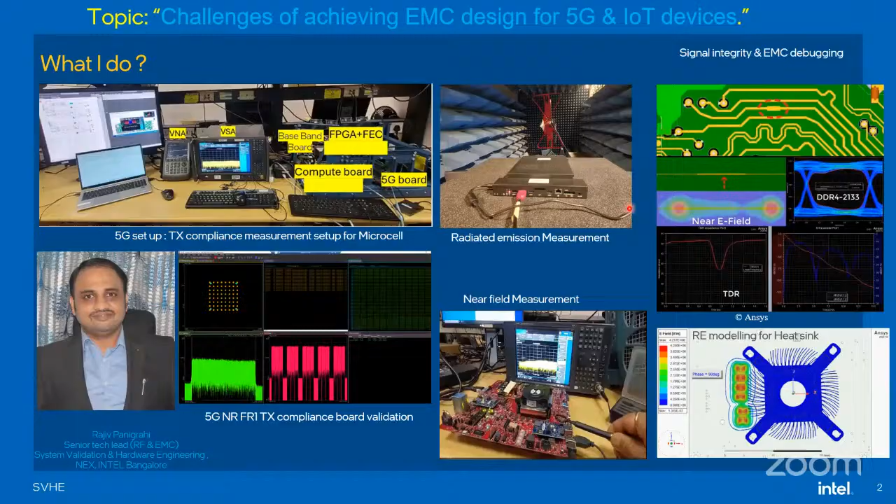So that's all about this quick EMC measurement and simulations overview. As I told, I'm quite involved in academia recently. So for the last 2 years, I'm offering a course at IISc Bangalore under the proficiency course, where we discuss the fundamentals of EMC for professionals.

So we see how, from the scratch, you design and introduce EMC at the beginning itself, so that it saves time as well as cost, and also gives you a good signature before going to certifications. So I have taken one common slide from this course - wherever I go, I take these slides and discuss this.

We are engineers, so when we read such things in a national forum where a national paper discusses engineering stuff - it says something related to cybersecurity, as well as somebody using AI. We heard this buzzword, AI. Through AI, they can actually steal your passwords. You might have seen news that a few passwords are weak or got leaked, but this is very big, on the front page, saying that hackers can actually use AI and HDMI cable to do this.

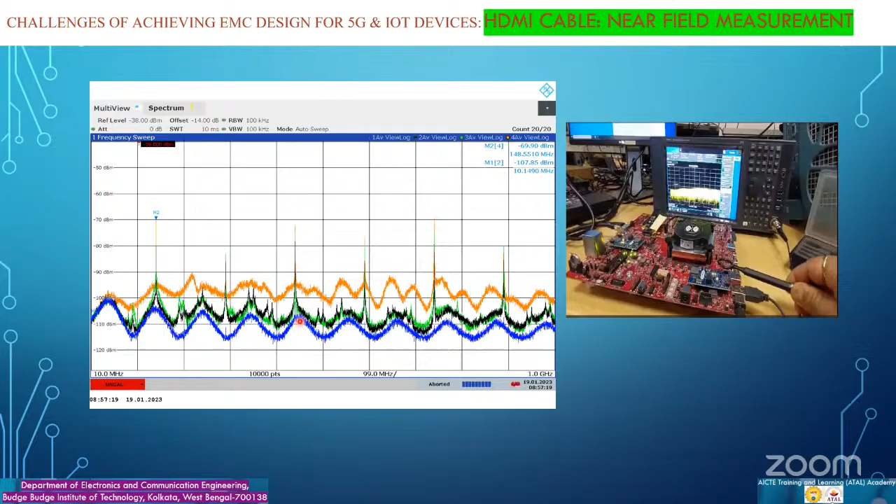So the question comes: how come one HDMI cable has a different electrical behavior? This is what is talked about on the national base. One raises the question based on the submission. Another says the answer, it is not necessary - all HDMI cables actually start radiating. So it all depends on how your cable is.

If your cable is well shielded, metal wrapped around it properly, you fall under the green board. If your cable is poorly shielded, you come under the orange board. So the answer is dual.

Yes, it is capable - as the submission says, if from the HDMI cable it is capable of radiating, you could use some convolution neural network to retrieve the data. If you can retrieve the data, certainly you can actually steal the passwords. That's what it talks about.

At the same time, if it is properly shielded, and technically if you look at those coupling behaviors across the frequency, then you actually lie on the green board, where it tells you it is impossible to get your data. That's what these two are talking about.

So you have to look at it in terms of engineering thoughts - how it is possible or how it is impossible. The answer lies in what you're actually looking at. So you have to choose the proper HDMI cable. That's why EMC becomes very interesting.

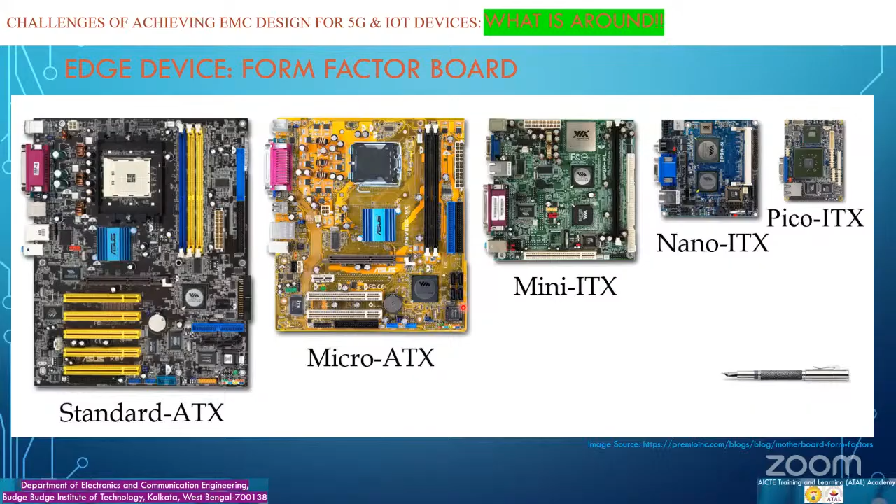So you make any small or big system, this is how it looks like. Maybe you have analog circuits only, or a digital circuit, or a combined one. You need power circuits, you have to run it, right? So to run the system, you need low frequency circuits. To reach out to the outer world, you need connectors. If not by cable, you have to do wireless, that comes under Wi-Fi or Bluetooth, right? But to assemble all these interfaces, you need a multi-layer PCB.

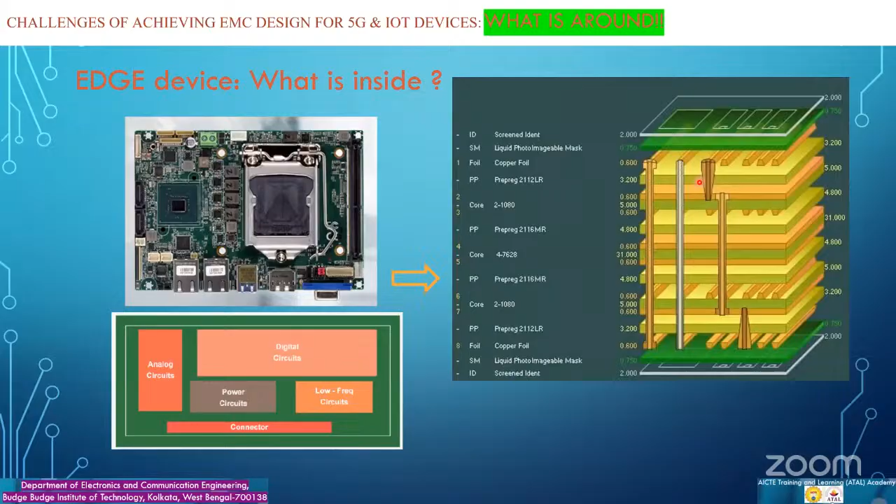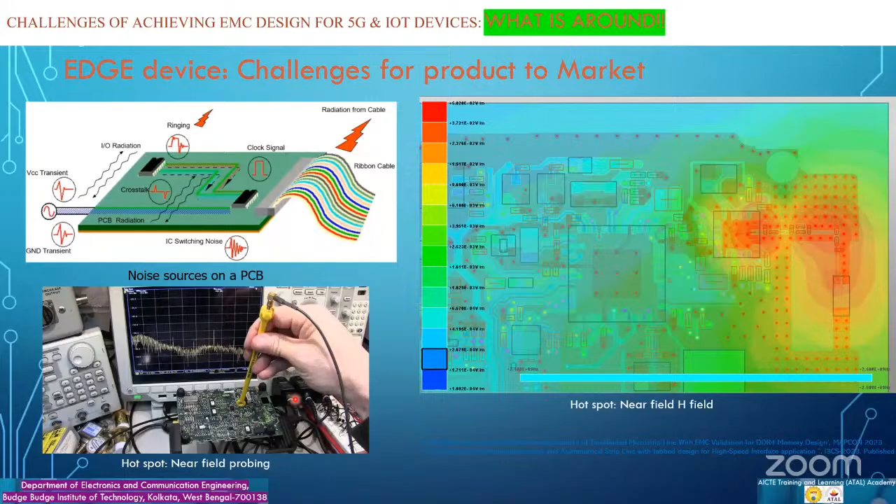So France halts iPhone 12 sales over radiation levels. This particular iPhone actually exceeded the limit, so that's why they stopped it. Just imagine, France has ordered Apple to stop selling the iPhone 12 for emitting too much electromagnetic radiation. It means you have made 1 million products, and just because it couldn't meet their requirement, they said you cannot sell it. That's a huge loss.

So what we understood from here is that when you couldn't meet the certification from EMC, electromagnetic compatibility, it certainly impacts the user itself. If the user is using a pacemaker and your product is not qualified, it can interfere with the functionality of your pacemaker. When you say interfere, it's not intentional, it's unintentional. It means it can stop your pacemaker. That's a hazard. There's so much other history also there.

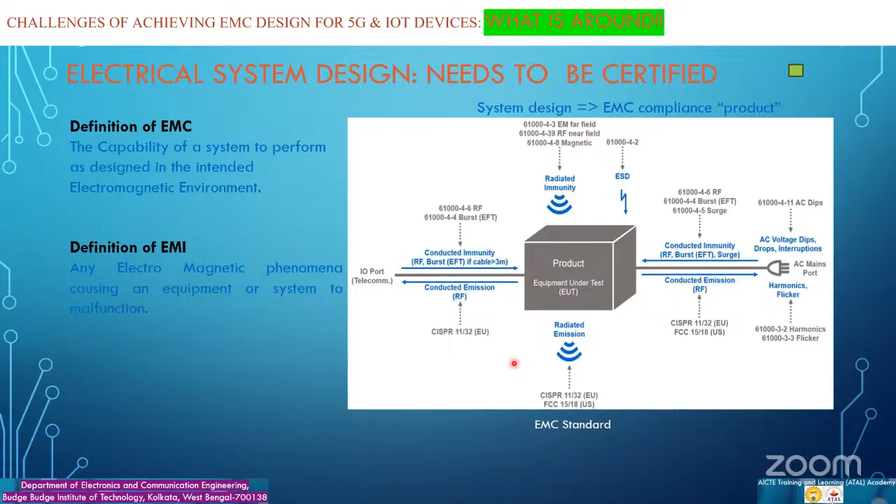Likewise you have CISPR 11 or FCC 15, CISPR 32. If it is automotive, CISPR 25. Likewise, they will give you these numbers, and you need to get tests at the lab and make your certification ready before sending to the customer. Okay, so that's all about the fundamentals of EMI and EMC, right?

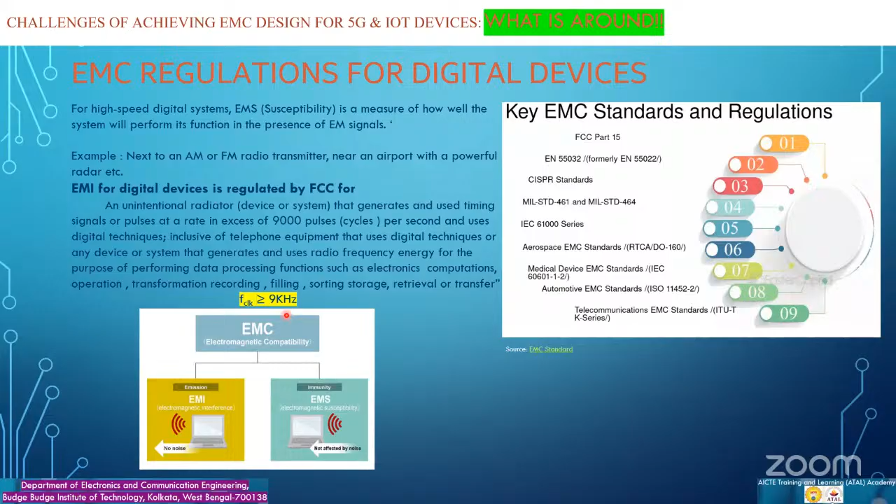And you see here, this is very fundamental, like the F clock of 9 kilohertz. It depends - when you are doing a test for your product, there are certain bandwidths also involved. This 9 kilohertz we will discuss in more detail when going into the simulation part. So now again, coming back to the edge or the 5G - we are actually surrounded by different wireless devices, right?

As we discussed, other than EMI and EMC, there is something called RFI, like siblings fighting inside the home. So if your interface, other than its functionality, starts interfering on the antenna side, basically you are talking about the receiver side.

So basically what you are doing is threatening your receiver sensitivity. Let's say your Bluetooth is capable of 1 Gbps speed, or your Wi-Fi is capable of transmitting or receiving at 1 Gbps speed. Because of internal interface interference, or radio frequency interference with your antenna or Wi-Fi receiver, whatever throughput you have will come down. So that comes under RF desense.

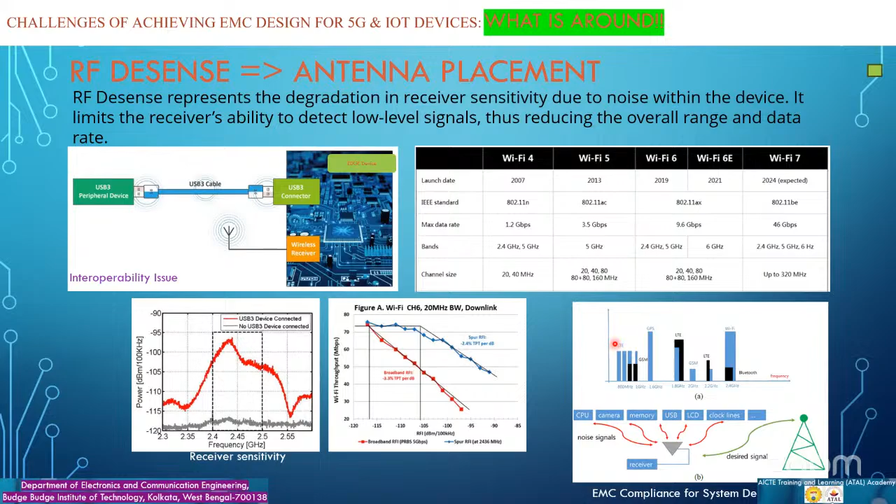So that's a challenge - we have already discussed that. That's why, to meet those requirements, you cannot have a compromise. That's the point - if you miss any of these particular topics.

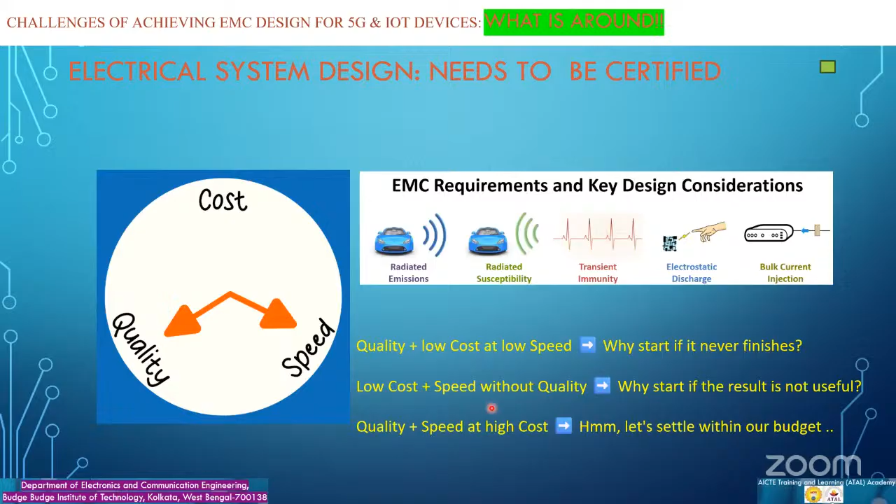So now the question comes, when I make an electronic design, how does it look? This is what you get - an EMC measurement test report. So what we see here is, for any given DUT, these many tests are required. I don't want to go into too much detail, since unless you are introduced to it, it looks very boring. But you can see, for a given electronic design, this is the report.

It's available on Google, you can actually see it, and you can see the product too. That particular product has so many tests - this is how we do the testing.

So this involves the cost. Whenever you are doing any kind of test, it involves cost. The cost involves going from your lab to the test lab and coming back, because you're not a goldsmith who knows the design will pass. If you pass at first, you are really lucky, but most of the time you get failed because of some minor mistake. Because of that, these many tests and these many costs will be added until you pass it.

So this is what it tells - if you want to do a full FCC SDoC test, you have to spend around $5K. Full FCC certification will be $10,000.

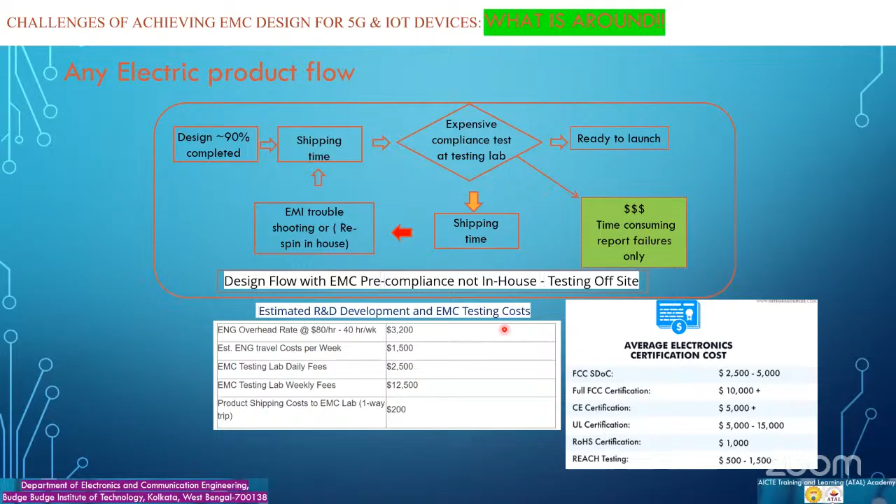These are the different certifications you do, and you'll spend this for every product, plus you have this additional cost. So let's say if this many tests have to be done, this is the cost of the whole process.

In case you haven't introduced the design and pass it to the lab, you have to pay the money. So what we see here is if you introduce your design at the pre-compliance test stage, it is quite possible you can identify issues before going to the lab, fix it, and then send it to the lab, which will actually reduce your cost.

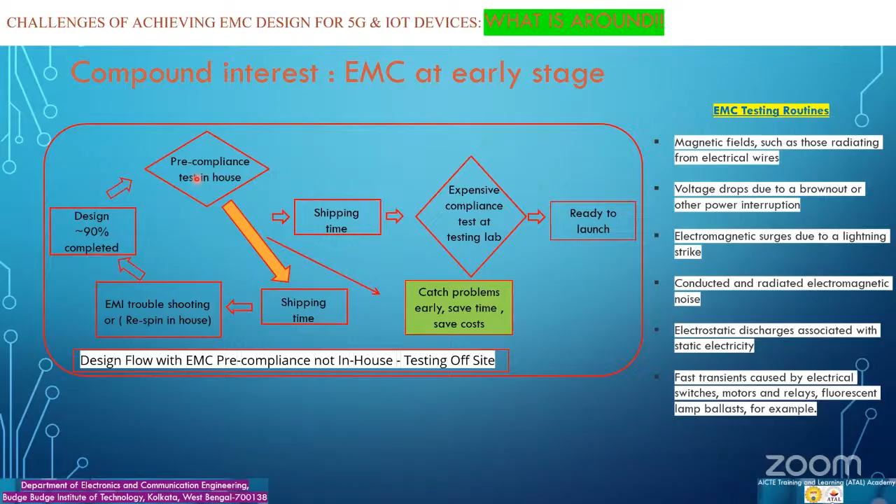That's the ideal approach, old school thinking. Before going to the given test, let's have a pre-test, similar to how before any exam we have a pre-test kind of thing. That's called a pre-compliance test. It can be in your lab or another lab which will be cheaper. But still, unless you qualify here, you have to repeatedly do it.

So if you are going directly to the test lab, what you'll spend is 15 weeks and $91,000. This is for a given product, product cost not involved. You made a product and have to pay this much money if you want to sell in different regions with particular applications. So it takes 15 weeks and $91,000.

But what if you have pre-compliance done inside your lab? That 15 weeks reduces to 9 weeks, and whatever money you spent earlier, 91K reduces to 43K, almost 50%. So that's your reduction in time. It's always good to introduce pre-compliance in-house, so you actually save a lot of money.

From the EMC point of view, what is saving money? If you introduce this pre-compliance in-house, this represents 1.9 million in revenue, because any latency means any delay to the market, and that reflects your revenue as well. First you have to spend money to get certification, and until you get it, you cannot launch to market. So you have to spend both. This is what actually is your gain - by introducing pre-compliance in-house, you save $1.9 million.

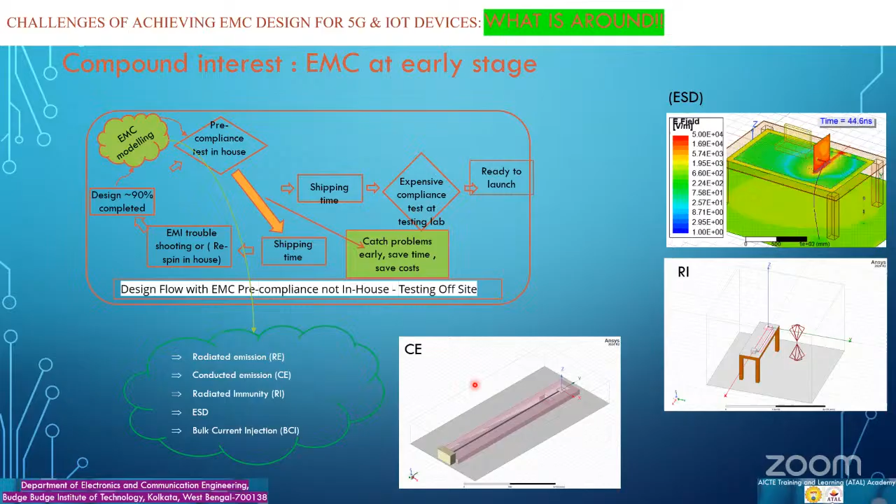So that's today's capability. Now the immediate question comes - anyway this is through electrical engineers, but if you look at it from the EMC perspective, I'm talking about engineers who are making the electronic product, not any electrical engineer specifically, just engineers in general. When it comes to engineering, you have no excuse not to learn mechanical, thermal, electrical, power delivery, or the CAD side. You should be aware of it, because when you are making a product, these are all part of your game. You cannot say I'm an electrical engineer, I just look at my EMC electrical part.

No, then you cannot make a proper electrical product design. You need to understand how the power delivery happens. If power delivery is happening, you should know these things at least a little bit, just to stop any EMC issue from the power delivery aspect. Same thing applies for mechanical, thermal, and CAD - whoever designed the entire board. Whenever any EMC issue comes up, generally people say, okay, since voltage or current is involved, it belongs to the electrical department. No, it belongs to everyone. If anyone actually misses it, the EMC issue will pop up. So that's what you need to be aware of, especially if you are making an electronic design, since certainly you have to meet your targets.

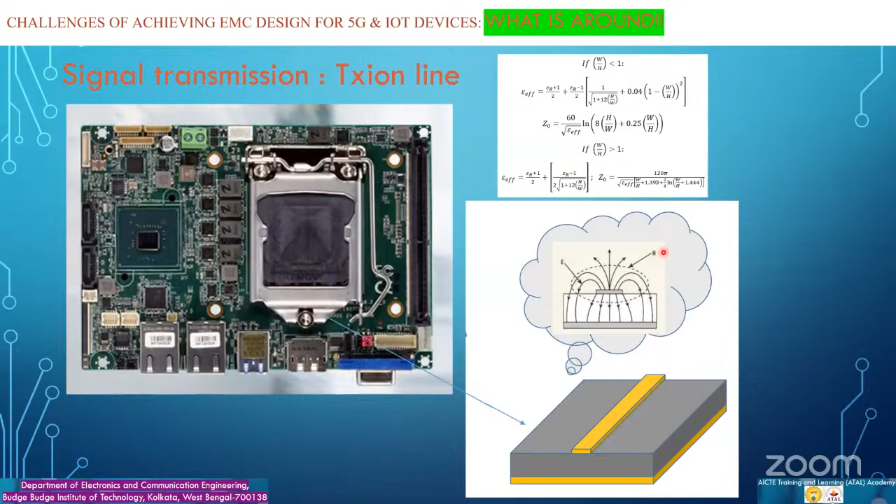Now going to the little basics, since this is a session where we want to understand what is EMC. This is a very fundamental transmission line, where you have electric field and magnetic field. Going back to different types of electric and magnetic fields, you say different types of transmission lines. What does the transmission carry? It carries your electromagnetic fields together, where E field and H field look like that. By understanding this electric and magnetic field, you can actually work out how this board looks like.

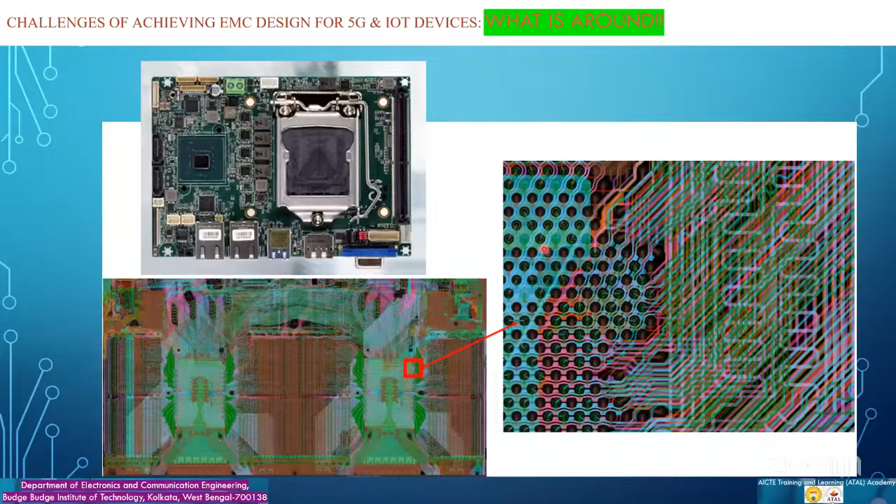So what we saw earlier, that's what's taught in the class - the transmission line looks like this. But actually, whenever you go to an electronic board, these are all actually transmission lines. They are all netted - almost 10 to 20,000 nets are here, and they cross each other. So that's the important part of your EMC modeling. With this, you have to verify whether you have issues on EMC or not.

So again, coming back to the basics - this is what we actually taught in the class. This is my electric field and magnetic field, and we just follow Maxwell's equations.

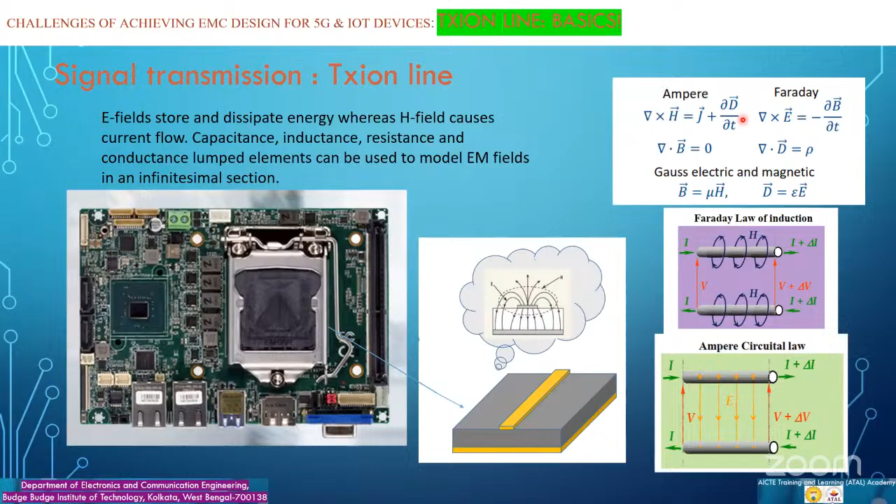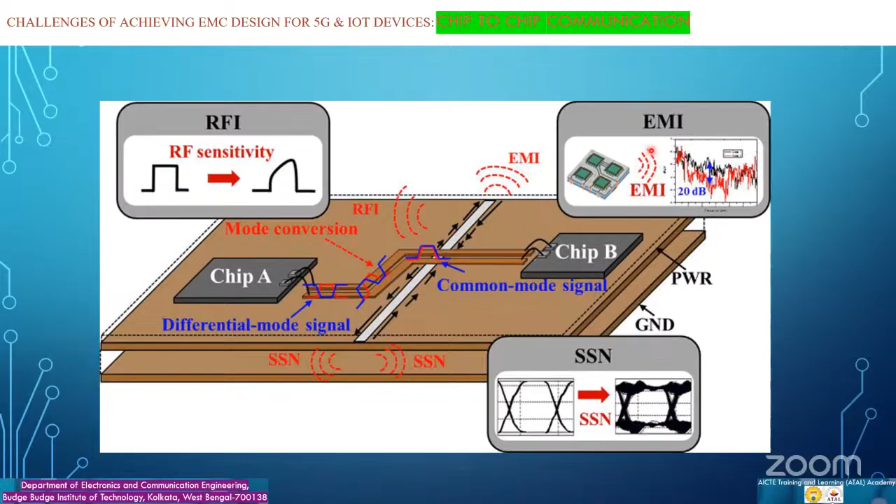If you go real time, you see communication between chip to chip passes through all these power planes and the split ground plane, which causes a lot of your RFI and EMI. That's actually something you can analyze.

Coming to the electrical design a little bit - when you're trying to communicate between chips, you need to understand how it works. These are the parameters on the frequency side from the transmission line characteristics, involving return loss, insertion loss, and crosstalk.

But when it comes to the time domain, this is how the pulse looks like. So what you send at 1 volt, you will get at 0.5 volts - from the signal integrity point of view, you see the functionality is degraded.

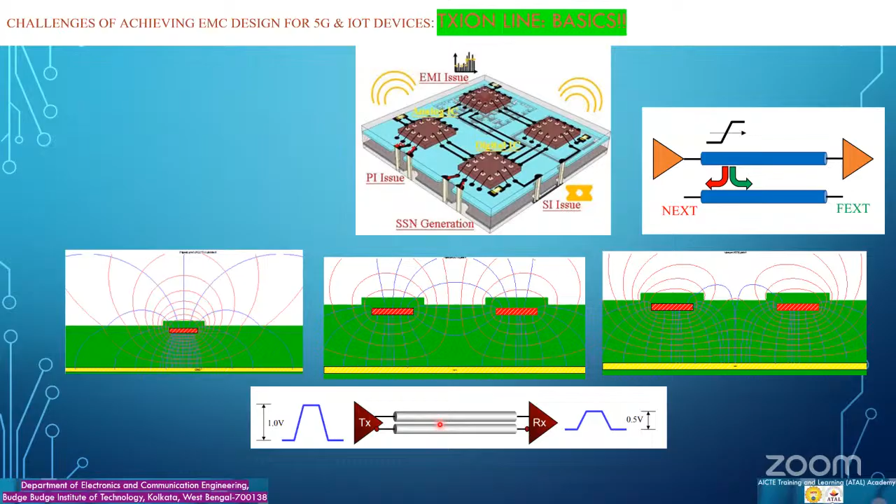But the immediate question comes - where did this 0.5 volt go? You sent 1 volt, you received 0.5 volts. So where is my 0.5 volt? It's actually dissipated, either as heat or as radiation. This is how it looks like.

For any given board, it can reach out through conduction or radiation. Conduction is through electric current, radiation through electromagnetic field. It can be inductive coupling through magnetic field and capacitive coupling through electric field. Between two circuits or two chips, you'll see these emissions of radio waves.

Electromagnetic inductions and electrostatic induction - when you try to connect to the outer world, it induces noise and starts radiating. What we discussed at the beginning about the HDMI cable - this is how your cable carries it. When something is emitting from an RF point of view, it's an electromagnetic wave, but from a data point of view, you're leaking out your information. It's radiating means it actually carries your information or your data.

Now if I go to the basics of EMC - why does an IC actually start radiating? This is very fundamental. If you see a dipole antenna, when you give 0 volts, all your electrons are stabilized, but when you apply more than 0 volts, there is a movement of electrons. The direction of electron movement changes with the voltage polarity. Now immediately when you move to a sinusoidal signal, there will be movement on both sides.

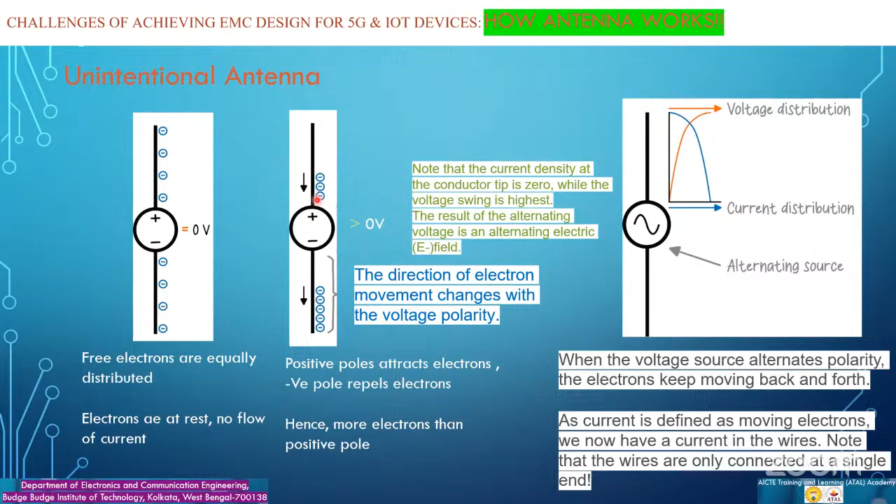Because of that, what we see is it will create an E field or an H field, and this is how it looks like. So your IC - this is just reverse engineering of how the IC looks like. This is your IC, this is your signal or the forward current, and this is your ground, which carries the return current.

But if it's not properly designed, the same IC, which is capable of functioning under particular conditions, can act as a radiator. So this is what I wanted to show - although that's the basic of an antenna, this is how your IC can also radiate. It's not necessary that only through the cable can you radiate - from your PCB board or the system, it can also radiate.

So to stop that, you need to understand through these RF tools or EDA tools, or certain basic thumb rules we'll discuss at the end, so you can stop making those mistakes. If you do the reverse engineering, EMC is nothing else but reverse engineering of your RF side. Generally in RF, we make an antenna which is intended to radiate, but in EMC, we try to find out why the radiation is coming, which is unintended.

So it means it is someone's mistake. You are finding someone's mistakes, trying to understand how Maxwell's equations work and how antennas work. From that theory, you try to find out the source of your emissions. So that's how the basic of your IC starts radiating - at the beginning we understood how your HDMI cable starts radiating.

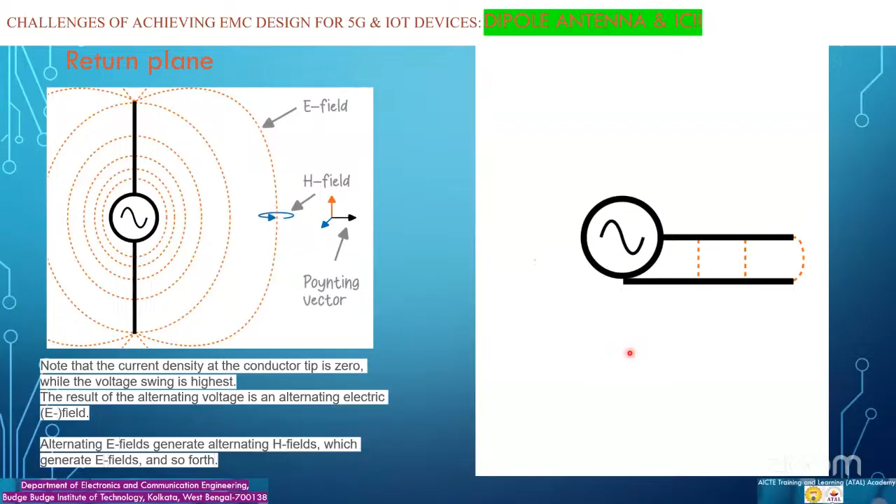Now we are seeing here, yes, your IC can also radiate. What we see here, the pin which carries the signal and another pin which supports the ground, can act as a dipole antenna.

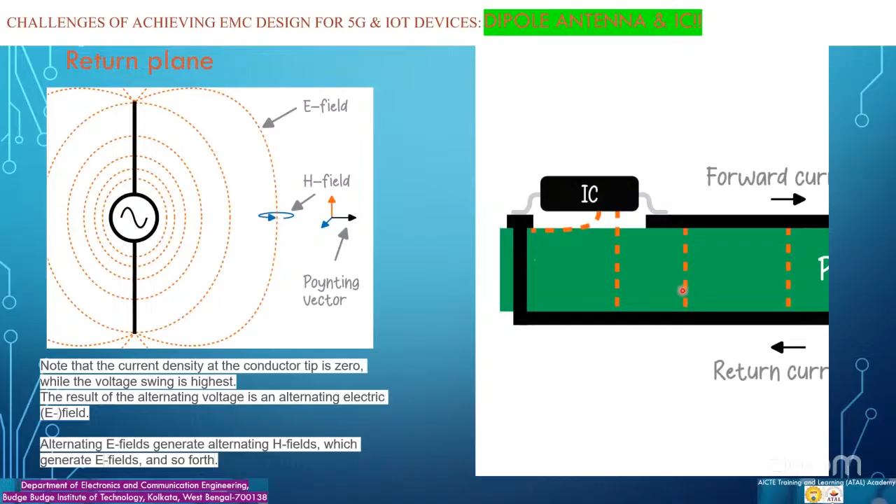So it means your IC also can act as a dipole antenna. To stop all those things, there are some basic rules - you have to make your design robust. This is the fundamental one we just go through. It's not limited to only those 9 rules, but if you follow it, it will be easy.

So coming to the base of your system design, you have to follow certain things so that whether it is 5G, 6G, or IoT, at the lowest latency with a smaller size and robust design, you will still pass the EMC requirement. Because if you fail to meet the requirement, you cannot sell it or tell your friend that you have made a design. If you want to tell someone that you have qualified the EMC, then the neighbor will know that you have made a design available in Amazon.

So that's what we are saying - these are the basic thumb rules. If you want to make your crystal clock, which is the main source of your total processor design, you have to make the crystal clock more robust, so you have to give more shielding. Similarly, there are some high-speed interfaces, and as we discussed, you have the power planes. The power plane and the high-speed interface can actually interfere with each other, so you have certain ways of keeping them separate.

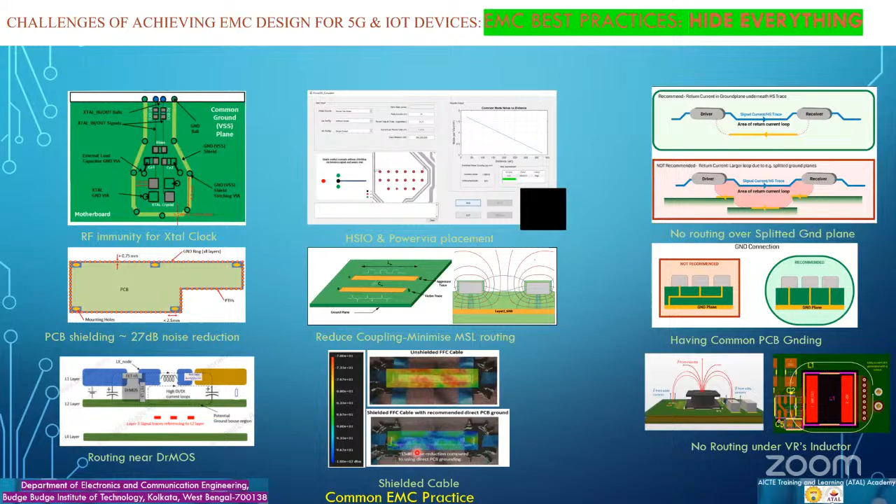So with this, I've tried to collate the challenges for achieving EMC design from the 5G and IoT devices. If you look at whether it's 5G or 6G or any advanced technology, if you're involved in electronic design, you need to introduce EMC at the beginning.

So here is some current work. Keysight and Ericsson have already demonstrated a pre-6G network at IEEE International Conference on Communication in 2024. We are at the end of 2025, so we are already advanced. This is a claim by the engineers that they have demonstrated it - that's what we read, Ericsson has demonstrated it. At the same time, this creates a lot of problems - the 6G impact on EMC.

What's next? Whenever you go through the chronology from 1G to 6G, you're basically increasing the speed, increasing the frequency, and decreasing the latency - you create a lot of problems on the EMC side. This needs to be understood in more detail. Without compromising quality, delay, or cost, you can actually make it to the market. For more detail, you can look at the pathway on 5G EMC testing tutorial - it's beautifully written and describes the challenges on the 6G side.

Okay, with this I will try to close. I think I have extended almost 5 more minutes. If you have any questions, let's have a quick one.

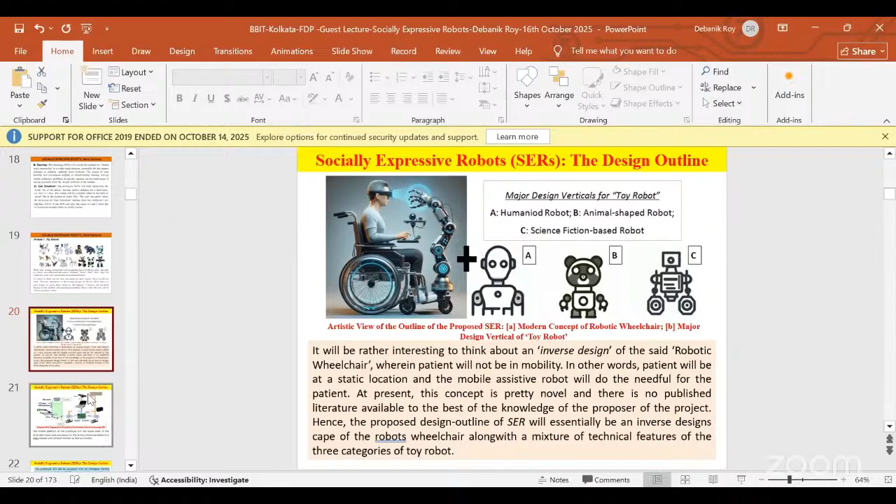There are two modules. One is module one, another is module two. The first module I am calling the HMI console, which is extremely important for SER, because that is the console through which it can have the feel of the game. And the second module is essentially more on control system development, with motors and software and all those things.

And of course, all the mobile robot technologies like SLAM, simultaneous localization and mapping, and sensor driven things, these are all applicable for SER. Most of the navigational things for mobile robots can be taken for that. In fact that has grown and become very stable in our country also. Now in India we are manufacturing full-fledged mobile robots with our homegrown technology.

So I thought all my SERs, or even my robotic wheelchair design, must be built on mobile robotic technology, because that is a more stable technology that we have already come across. And the standard systems of mobile robots, sensors like lidar, camera, or proximity sensors etc., we can use, and the technologies are available to sustain there.

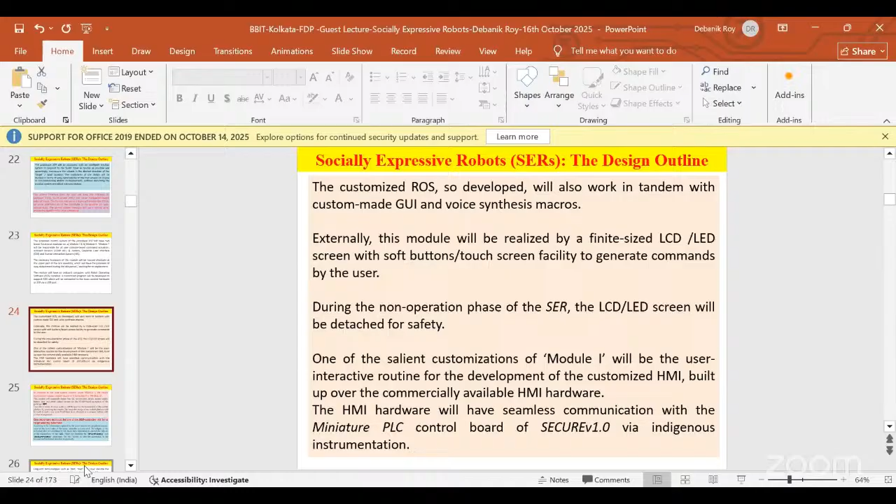One important technical feature for all SER controllers is target seeking behavior. This is a very important thing.

This target seeking behavior means it can either be a guided locomotion or a free locomotion, like when the SER is not having any duty, or the patient is sleeping or not somewhere in the vicinity, then the SER can have its choice of free mobility. So that free mobility is essentially the mobile robot kind of thing, target seeking. But when it is interacting with the patient or with a human, its behavior will be totally different. It cannot afford to go around and hit the patient by virtue of its locomotion, and at the same time it will also respond to his query, so then that is not possible. So this target seeking behavior is a very important kind of interlock that all SER controllers must have.

That's a very important precondition that we should know, how it happens actually. And for that, in order to have this kind of situation dependent decision, the way a human can do it by virtue of our brain, how can you incorporate this situation dependent paradigm in the SER? There is no other technology other than fuzzy controller.

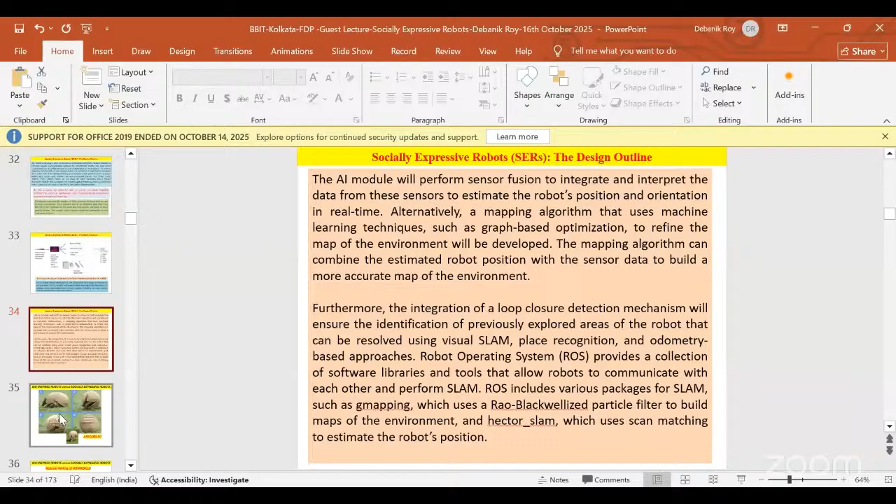So this is more or less the background of that. I will come to the details of the SER design, but first I'll take a detour into some interesting biorobotic features that helped me conceptualize this SER. I thought I'd take 5 to 7 minutes of the audience's time. This particular animal called armadillo actually took my attention quite some time back.

This is the principle - I will show you the schematic of the latest SER, the Spark, which is a spherical type robot design with piezoelectric sensors etc. I've given it the shape of a monkey, but the rolling is attributed to this armadillo kind of thing. So this is a very interesting creature in nature.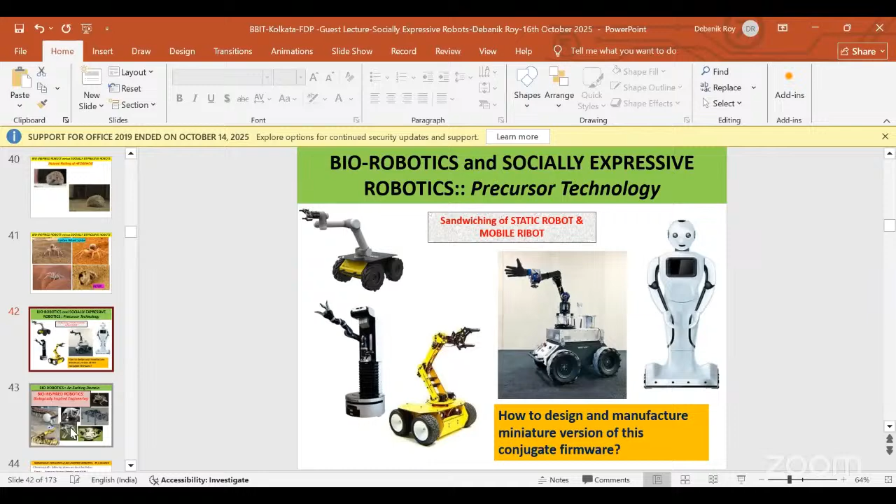Essentially, biorobotics and socially expressive robotics, as I mentioned in the initial slide, are the common thread - one is intermixed with the other. As we advanced with mobile robot plus static robot technology, that gave the basic clue for designing all ACRs. Nonetheless, the biological part is very important. Bio-inspired robotics, as we call it, has seen so many developments worldwide, and those are the clues. In that sense my research progressed, and we arrived at the ACR.

In different phases I have researched, and we came to the level of ACRs now. I will quickly show those. This is one design we made for a robotic leech, and this concept was used in the CURL project, and finally in the ACR, where crawling and rolling happen together. We made it a fully indigenous development, very small items.

It is for surveillance. Some ACRs are important for rescue and surveillance, as I mentioned, and there's even a national level thrust for doing that. So for surveillance, we must have a structure that can go along - we cannot afford to make a very huge robot for that. This is some of the prior art that helps us do that kind of thing.

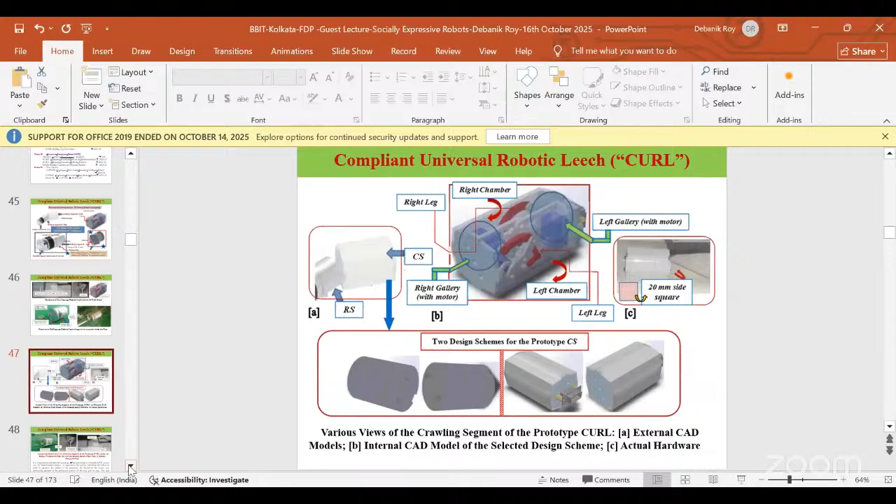These are extremely small volume designs, 20 millimeter by 20 millimeter cross section kind of a thing. You can imagine the small cross section and how technologically we have made these things. I am not detailing this much, but some YouTube videos are there which I will refer to, and one can see if interested. I'll just play a little bit, but not much.

We also started with a thread-based technology, and here it is shown that with a curvilinear surface also, this can go.

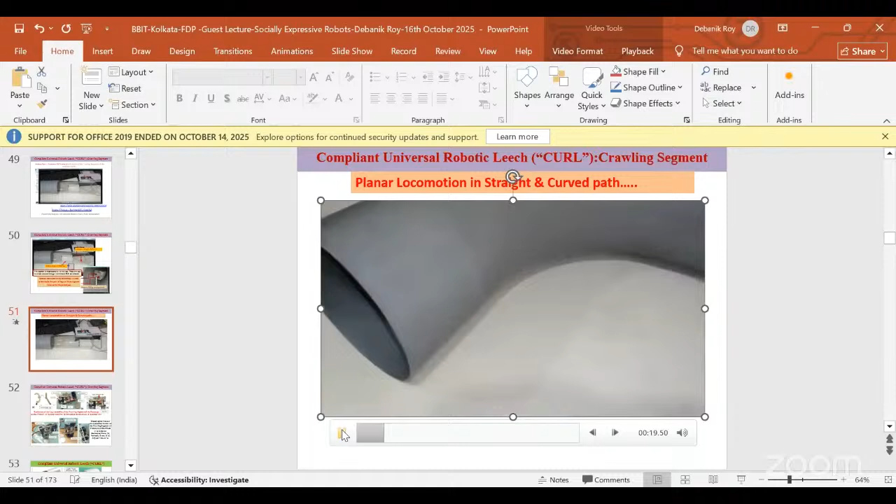So these are the things that happened, and all these design technologies are helping us take decisions for that. There are of course rolling systems also, but let me go a little fast and show some of the videos only.

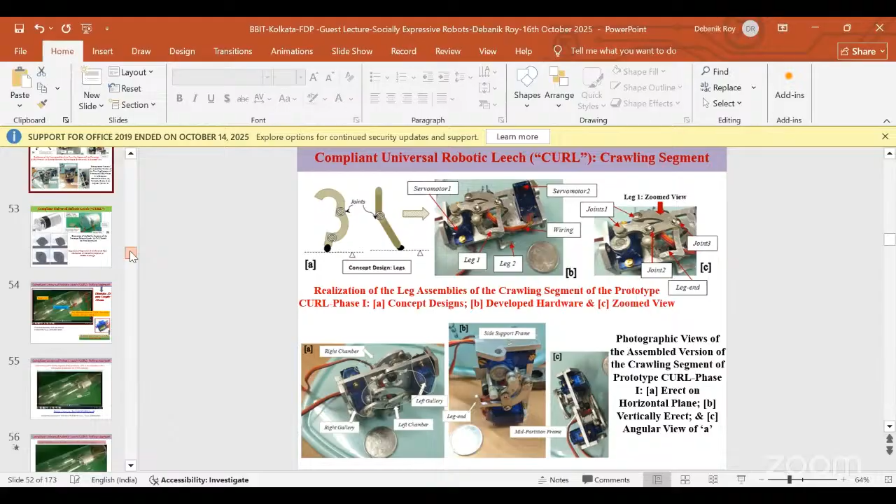This is actually a rolling kind of system, and you can see by a special technique, a special physics actually, we can make it roll plus progress over a curved surface like this. So many such things are possible.

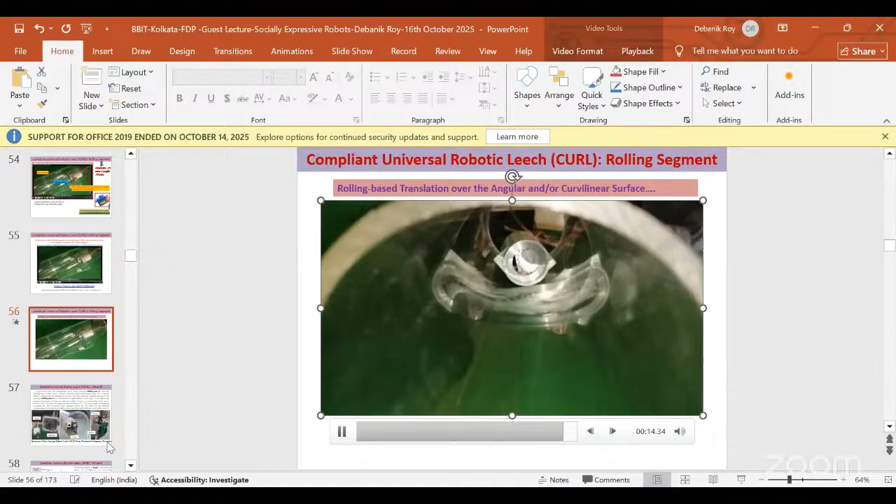Then we passed on to some things with more miniaturization and sophistication. Similarly, we progressed for a lot of control-based systems. These are very interesting control architectures, with two motors and then separate control for the legs and all. So all these creatures are having legs. Tomorrow, if we want to make an ACR with a legged system, then how will the systems look like? That is the reason we started with all this kind of very fundamental technology.

Another fundamental technology here is basically the rolling type of robot and crawling type of robot, and those are the fundamental parts of it. Let me just show some basic pictures of how the systems are going actually, like here, kind of a leg and wheel, both are integrated to that particular thing.

I will just go through some of the major parts actually. Just a minute. Yes, I want to show one more good video that will help us.

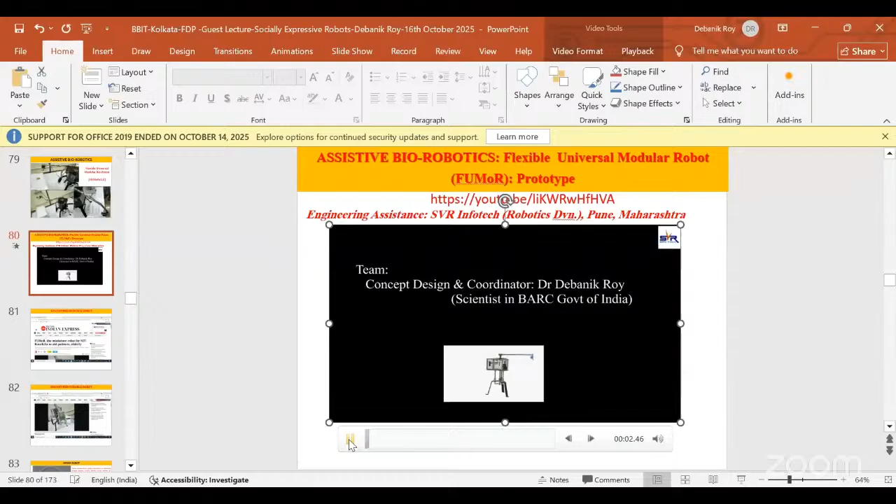This is a very interesting biorobotics project that we did, and it helped us conceptualize many of the grasp and other things with the flexible universal modular biorobot. It is a project that happened very nicely, part of my DST project earlier, and it was developed with a technology collaboration from a company in Pune, with my participation.

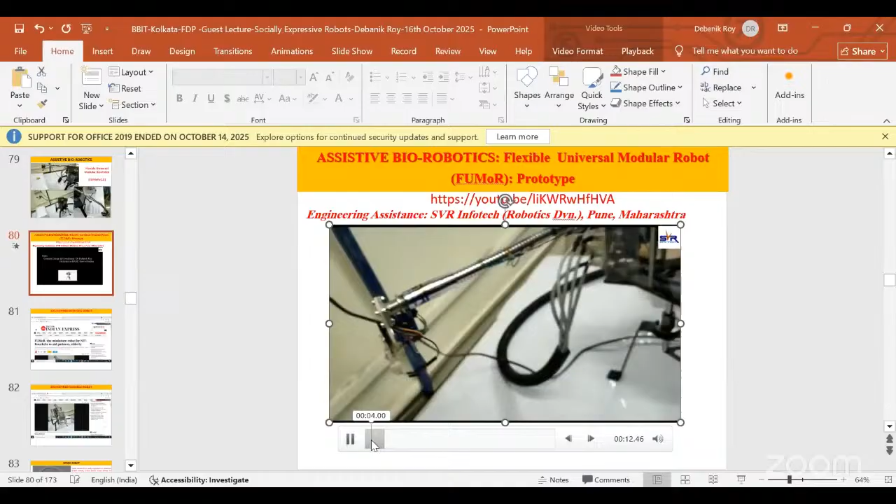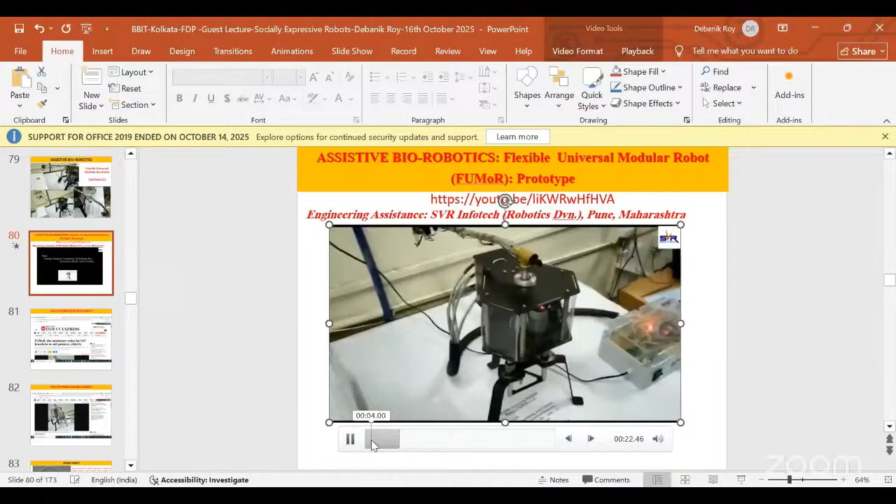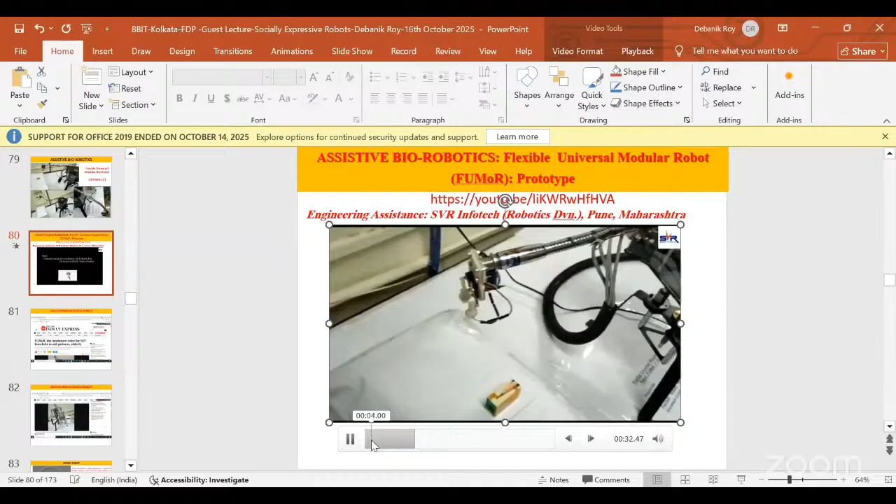Here we are experimenting how nicely we can have a lot of degrees of freedom in a single link flexible robot with a gripper. As you can see, whether it is a wheelchair or the ACR, we have to have the flexible manipulator attached to it for the purpose. This project was taken with the aim of doing that particular thing, and it is successfully doing it.

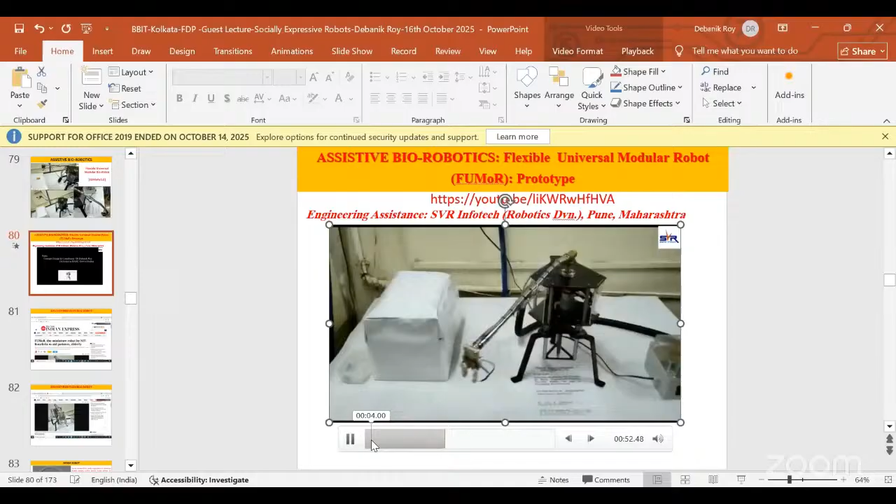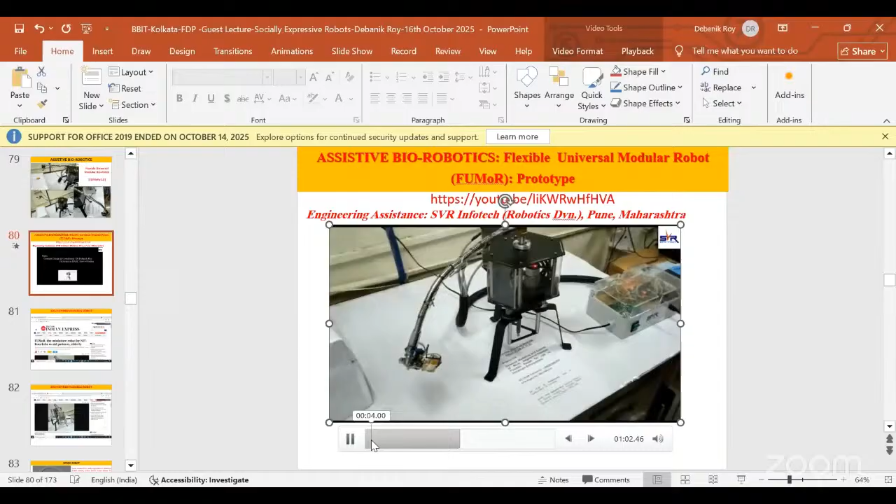You can see by the programming, you can make it really kind of a curved link, curved beam, and it is also able to grasp at that location. That's the beauty of the system.

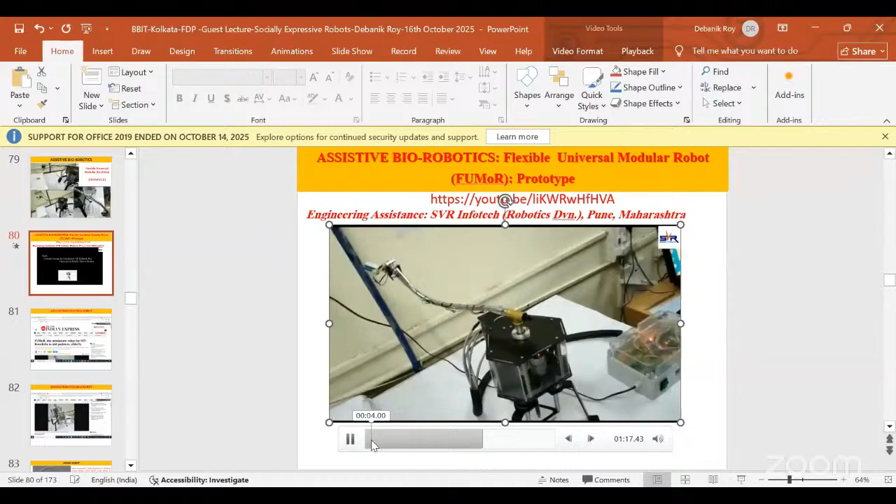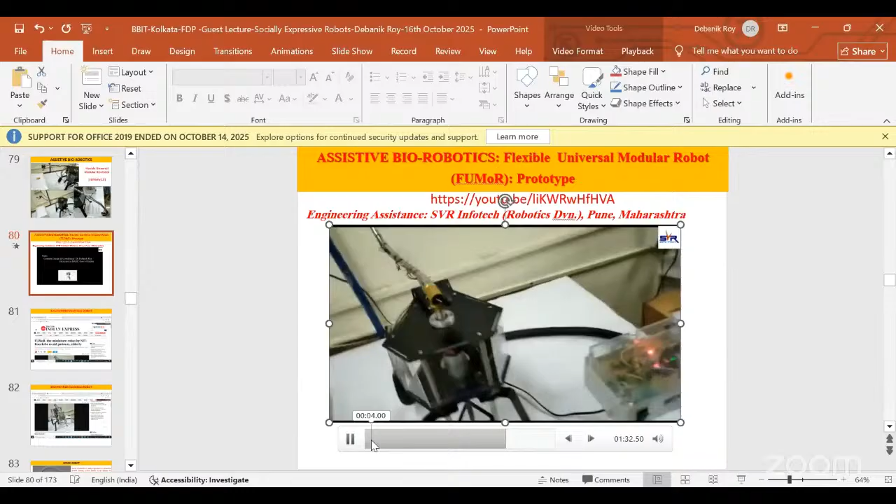This project has given us a very good confidence over a lot of indigenous building of the system. This was extremely praised by a lot of media at that time. You can see the Indian Express cutting that we developed in collaboration with NIT Rourkela, and it was very nicely developed.

The other area where ACRs can help with a small robot is the worm robot. I started doing basic research and making a small worm-like structure for agricultural use. Let me just show the schematic of that, just a minute.

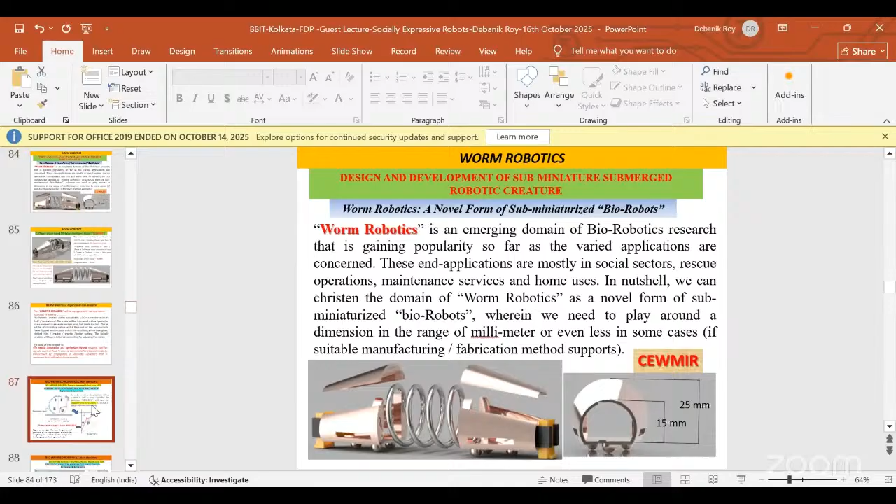This particular system has got three portions: the frontal, back, and the middle one, with a spring-based connection system. This is actually a very good design for the ACRs also of different kinds of structure. That particular essence has come from that.

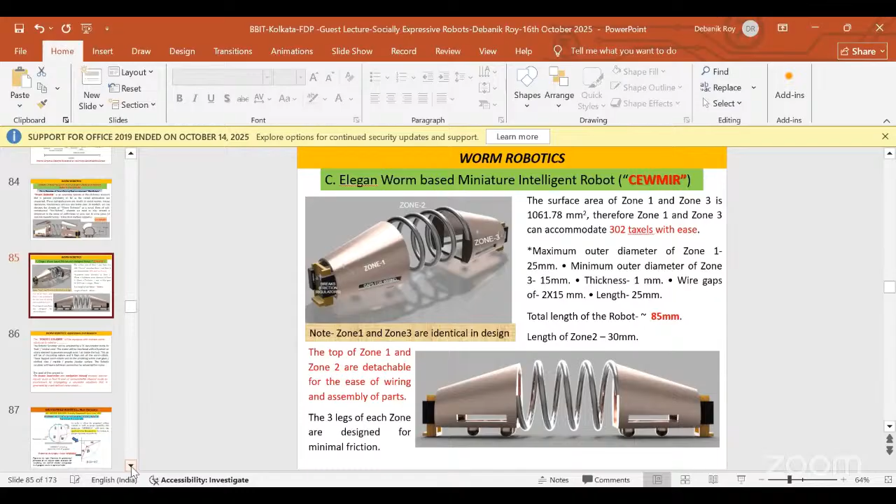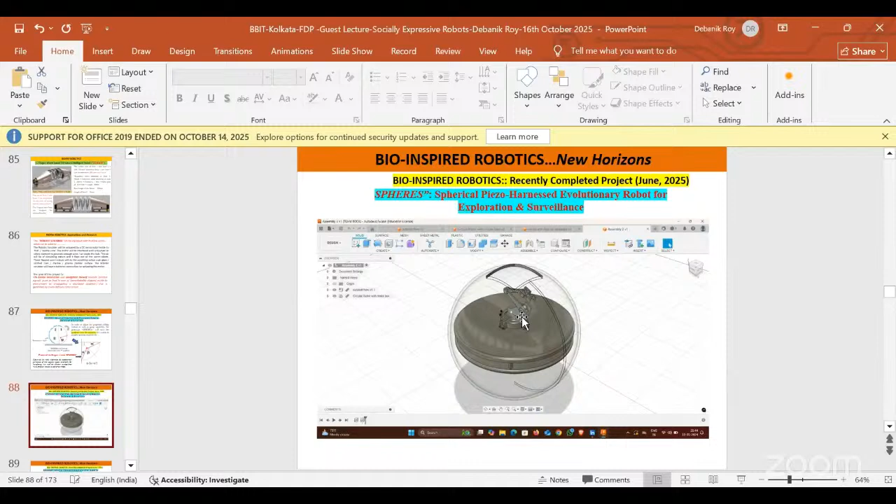The other interesting feature is the spherical robot. As you know, SPHERES, the last one, is a spherical type of ACR. So I started with a very basic design with a spherical surface, with a base and a particular manipulator inside. That was our starting point, and then we started experimenting on many such things and the designs, etc.

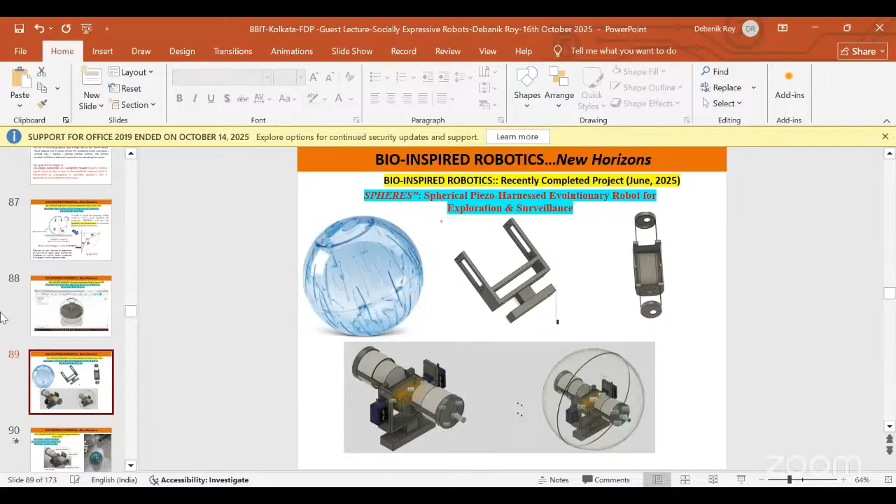My scholars and students worked very hard, and we patented this. This is the final product, that final spherical robot that we could achieve, and it has a...

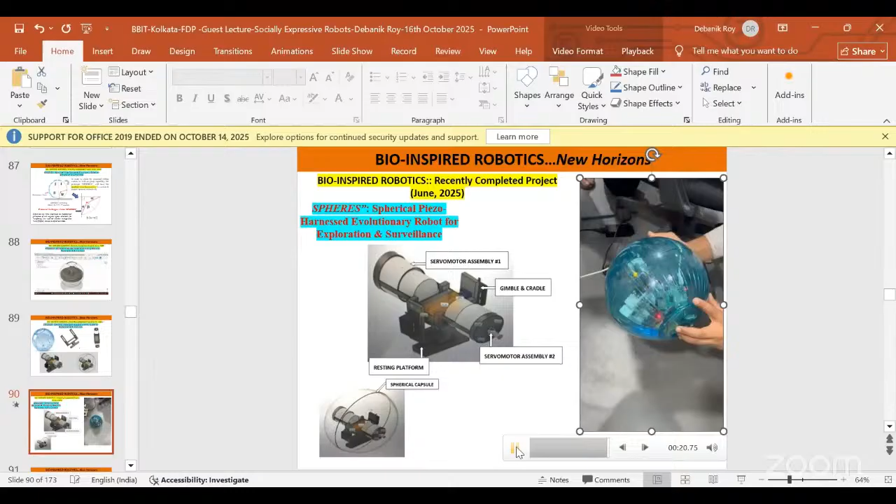Right now it is for surveillance purposes, and it can have mobility, etc. We will do it, and it is fully indigenous, and is a very good product for doing these things. And these are some of the dimensions of that.

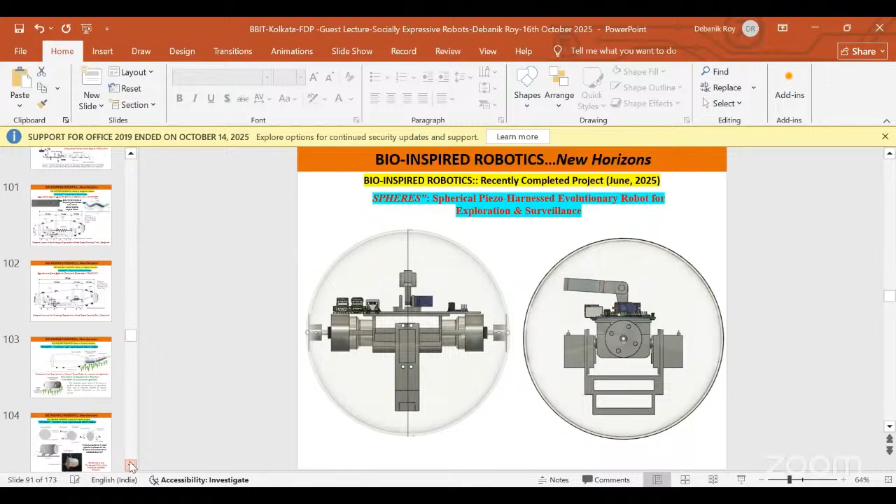I will now go through, and I will come back to the ACR again because time is short. So for all ACRs, the major thing is SLAM-based LiDAR navigation with human following mode. That is very much important, and that's how we have to do the thing. So these are some of the basic features of the motor skill and all.

We actually brainstormed on many designs, like a little kangaroo was also thought of once. So finally we zeroed in on penguin, and you can see that every part has got meaning. It is not just for aesthetics, but it has to be aesthetically beautiful also, so that the children should like it.

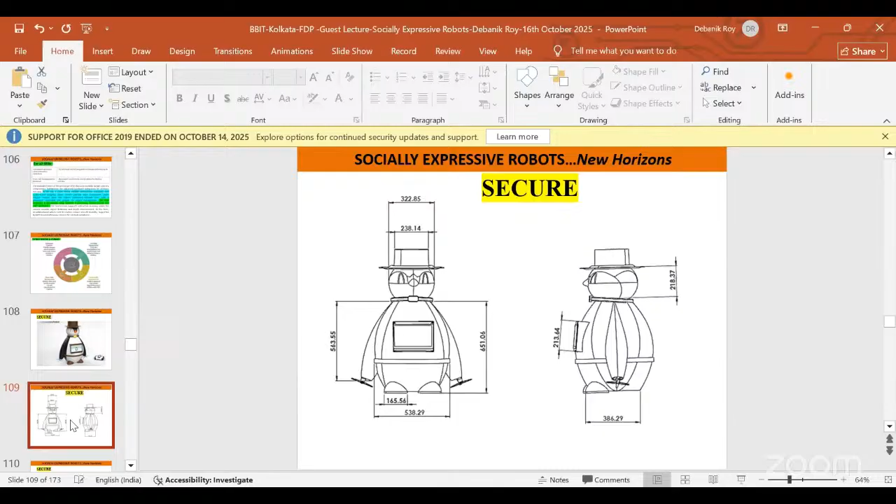So these are some of our design dimensions, and this is the exploded view of that. We have the lidar here just beneath the hat portion of it. This is the head, which has eyes, meaning the cameras, and we have the servo motors here.

We have two flappers just like a hand, the wings of the penguin, and the base. The major body is a kind of fat belly sort of thing, and that will house the electronics, and also it will have a display, the HMI.

I was mentioning that whenever we have to do some ACRs, it must have a good cylindrical volume. That is a fundamental part of it. Whatever the design you can think of, fundamentally the basic structure should be cylindrical, and then it will have a wheel. These wheels are actually for the flappers, for the leg. So this is the basic structure of our penguin robot.

If we go into a little more detail, this is the lidar sensor, and this also has a camera, and the controlling and other sensors are also here. We have a neck band with a camera also. It looks like a necktie or neck band, but it has a camera. These are the servo motors for that, and these are the cameras for that.

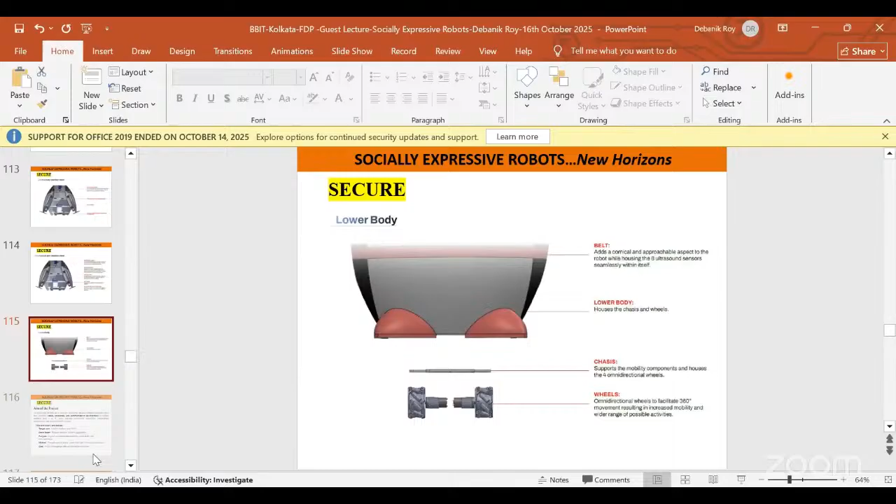If we go to the central body portion, this is the central body, with this structure. Inside this central body, there are several racks to keep all our electronics, all our instrumentation. That's the design that we had to do, and we have done it. And this is the bottom portion, or the flapper kind of portion.

I have already mentioned in several forums that the target user is autistic children between ages 3 to 10, etc. Let me show some of these details.

For our experiment, we have several objectives that we started with, how to do it and all those things. So these are objective 1, 2, 3, and the skills that we have to enhance. The first objective is to facilitate emotional understanding in autistic children.

So how can we make them friendly? They should not fear my penguin. The penguin should have a friendly gesture. That is our objective number one.

Then we have objective 2: encourage communication in autistic children. When we started doing that, several interesting things happened. First we tried it ourselves, and when we gave it to the actual child, I think the video is there, then several interesting communications happened, and we also learned a lot of new things out of that.

So we have given this kind of schematic for how it should actually be working.

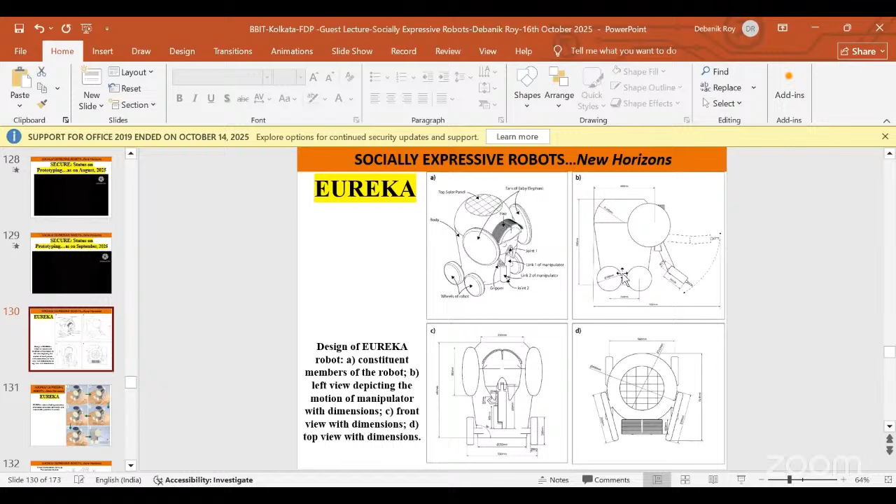This is the way it has been thought of, and manufacturing is just going on. Right now, I am not able to show a photograph of the manufactured product, but it is going on. This is the extended CAD, computer aided design, model for that. It has got four wheels, and the basic mobile robotic technology is still going on.

That's the fundamental thing—whether it is a penguin or an elephant, we are not disturbing the basic locomotion by the wheels. As I mentioned in my earlier slides on biorobotics, rolling type biorobot and crawling type biorobot concepts are there, and those concepts are actually being used here also, although in a much larger or bigger way.

This structure is very important. For Secure also the similar thing happened, except for the manipulator part. But for Eureka, this is the control system structure, the actual schematic—from the two-dimensional schematic, we can say we have the holonomic drive first of all.

This is also a very important case—the four wheels of the baby elephant structure are all a holonomic system. Holonomic system means they can run independently, they can be steered, and they can be programmed independently. That is how it happens in mobile robots also. And the manipulator is basically the flexible manipulator with a gripper, which will do the job. So this is the structure.

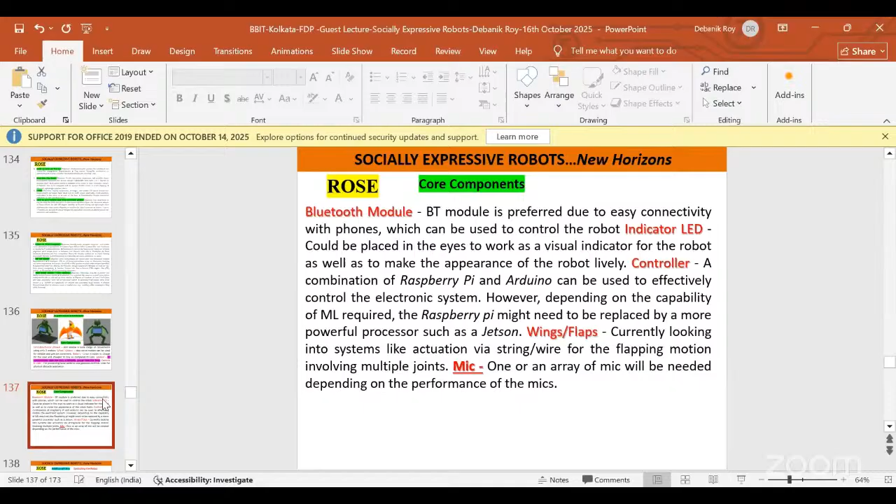We had three such systems whose concept was developed, but the major things are basically the wheel motors, battery, speaker, camera, lidar - all the fundamental things, and overall the ROS environment. Nothing is separated from ROS; we cannot really do that. It will have the Bluetooth module, LEDs, flapping system, mic, and all. I am not detailing those because they are fundamental.

For controlling the robot, we have autonomous mode, voice mode, control mode, manual control mode, and definitely the hybrid system of operation.

This is the last of my designs, still on the drawing board. It is called Spark, and the idea came from our success with the spherical robot last year. I started thinking last year that we can design Spark with a piezo sensor array. Experimenting with piezo sensors is very important, and it will have two flexible arms.

With one arm or one system, we are confident we will master the technology. But with a double hand, whether duality will help or duality will destroy some things, we do not know. In the case of a monkey, they do coordination between their two hands very well, like humans. But whether in the case of a robot, with two flexible telescopic arms and soft hand and soft fingers, the coordination will be there or not, we have to see. This will be a very interesting project.

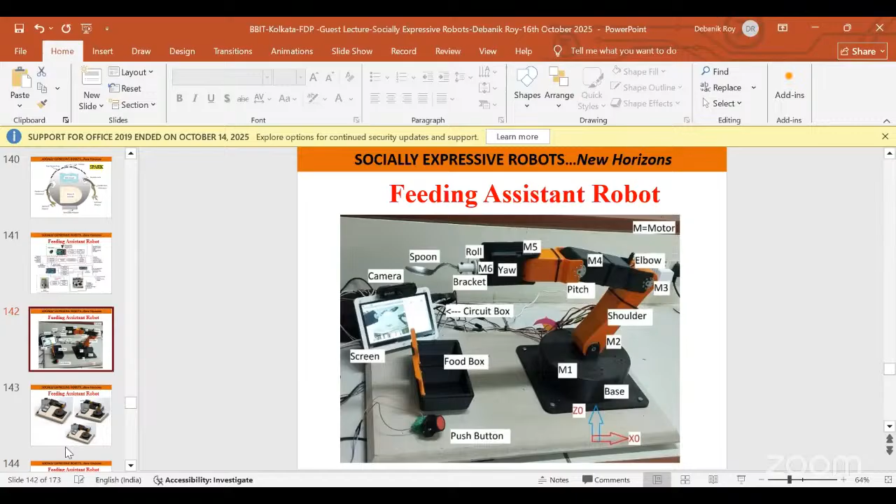We did several experiments, several trials for this particular thing, because it is not that simple - the spoon that the robot holds has to hit your mouth, not your eyes or nose.

All these calculations are important - face recognition in the sense of locating your mouth with respect to the face. Very recently, I will show some interesting experiments and research we did at IIT Gandhinagar, where my students have done very good work on trajectory planning for the robot, to exactly pinpoint the location of the spoon with respect to the mouth. This is a very important attribute, and we experimented a lot.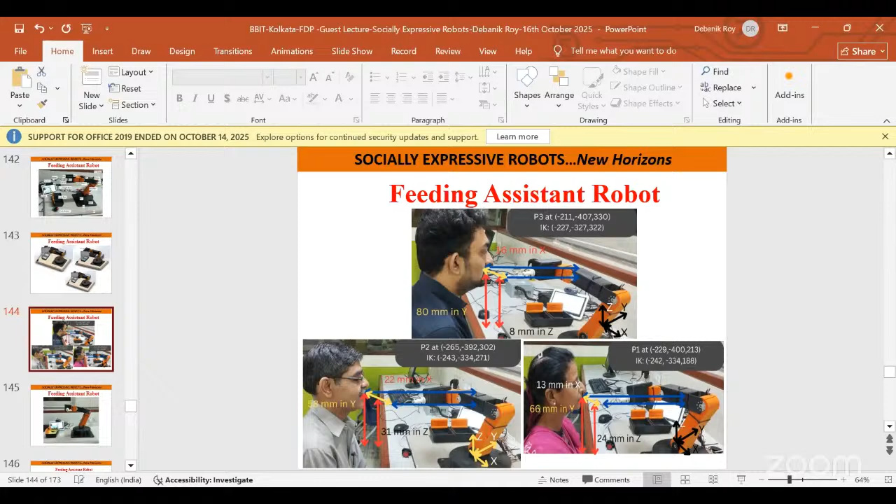In fact, a lot of subjects we tested, different ergonomic dimensions, ergonomic features, and we could talk about that. Actually, this is the feeding assistant system that is developed, and I do not know whether it will work or not. Let me see.

Are you able to see the video? No sir, it's static. Oh, I have made it static, but did the first page come or not? Yes, it came, sir, showing. Sir, the video is not playing till now. Video is not playing, sir. This one is not playing. Okay, then actually it was from the drive, I directly tried to access it. Okay, anyway, no issue. Okay fine, let me just remove it.

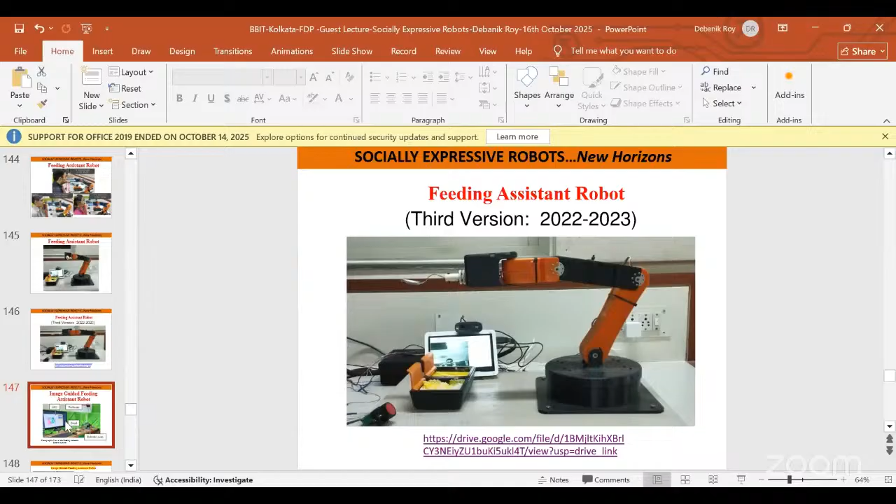This is one recent example from this year only - the image guided feeding assistant robot. Same concept, but we have now tried to give the system full autonomy. We thought of an image guided feeding assistance, and this was tried at the lab in IIT Gandhinagar. For that, we developed a particular specialized gripper.

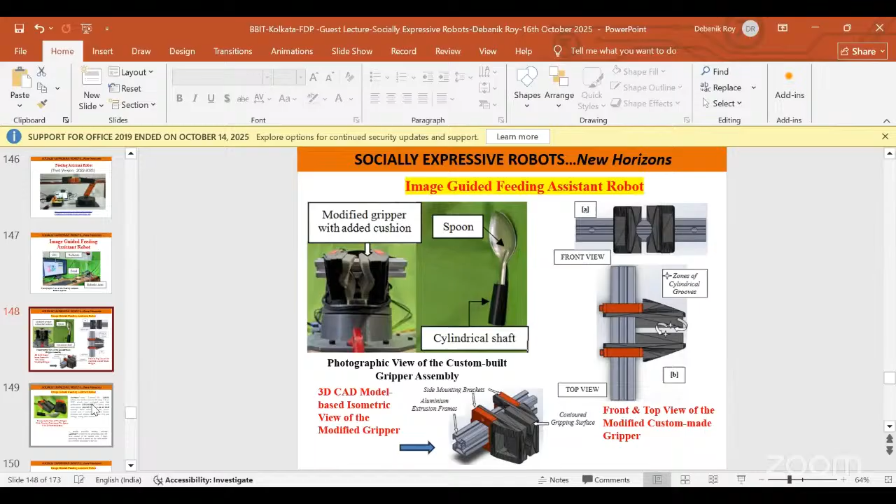This is a photographic view of that, with a modified gripper to hold the spoon in a proper way and give it a good shape. A lot of experiments were done, although there is no video as such here, but we have done many experiments.

Basically it is analyzing the workspace, locating the bowl and the human head. So the technology being used here is a little different from the earlier video of the feeding assistant robot. The head and bowl, and the relative distance between those, are the essential things.

As you can see, the students are experimenting on that, and we have developed the full kinematics for that - much improvised kinematics compared to the earlier one. The earlier one had inverse kinematics, but here we have used a lot of sophisticated algorithms so that even with a very small volume robot, we are able to do the feeding operation for the patient.

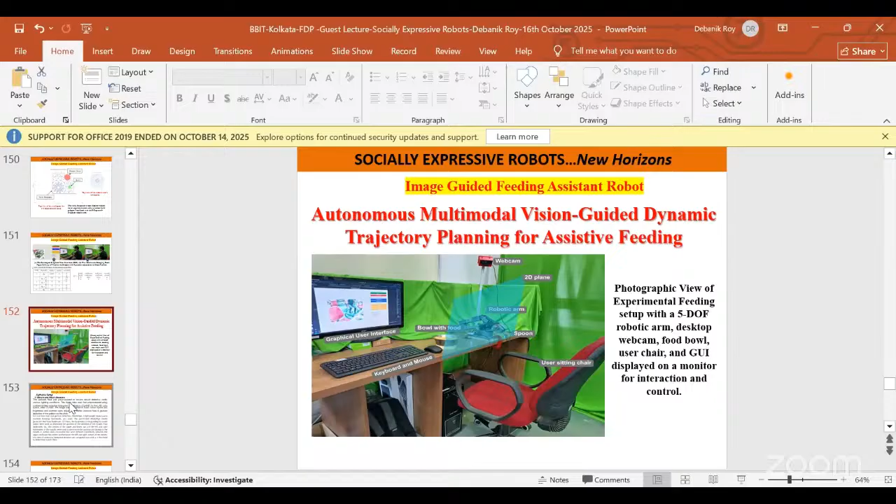The other aspect of this research was the multimodal vision guided dynamic trajectory planning, achieved through posture, gesture and mouth detection. In the previous case, we were telling the subjects or patients to sit in a particular posture, so that they should not make their head move much, so that the robot can understand.

But here we are having full gesture control and mouth detection. So even if you move your head, the software will analyze the most recent location of your mouth, your head posture, and then your mouth. That much advancement has been made to make the system easier - the way we eat, we can eat to the extent of our head movement or posture movement. There are a lot of programming and other issues involved, so I have given some references for that, which I am not discussing here.

And then we did the experiment with this particular robot. The trajectory has been fully planned, meaning from point A to point B, from the bowl containing the food. We experimented with only one bowl, with Indianized food stuff like bhujia, namkeen, and semi-solid food like khichdi, lapsi, dalia. All those things we tried, and everywhere there is minimum spillage to almost no spillage, and it is actually going to the patient's mouth with all body postures allowed. That's the beauty of this research, where we have got pretty good success.

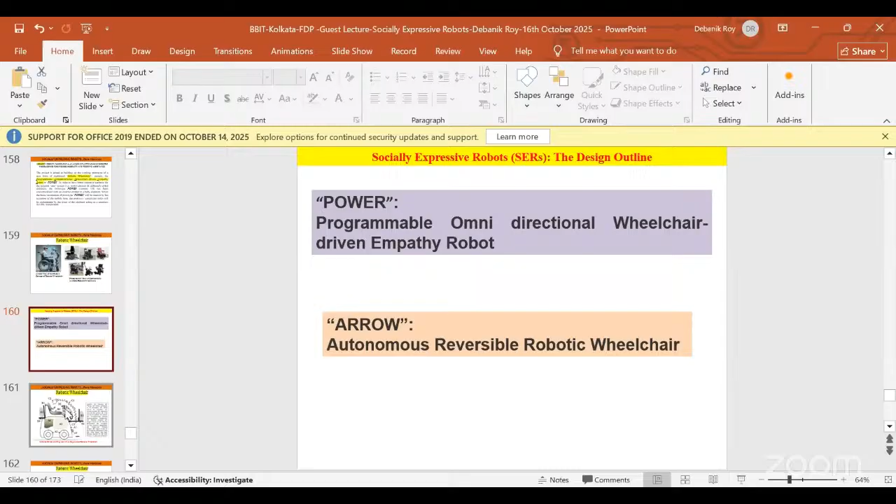That's the reason I have subgrouped this research into two verticals. One is Power, as I was mentioning. Another is Arrow, which is Autonomous Reversible Robotic wheelchair. This is also very interesting, that the wheelchair has to go backward, just like our back gear in a car. So how the wheelchair can go backside and forward also - both forward and backward movement in an autonomous way in the Arrow project. These two sub-projects are actually being tackled by two companies.

The solar part is very novel in our concept, because in India we must use solar, since we have so much abundant solar power. So all robotic projects, at least the outdoor robots, must have a solar system.

So that's the reason in the Eureka project I have used the solar cells, and also in this robotic wheelchair project I have used the solar units, and two manipulators, as you can see, one bigger and one smaller, having flexible manipulators, but with different kinds of grippers and end effectors to feed the person, to feed medicine, to feed foodstuff.

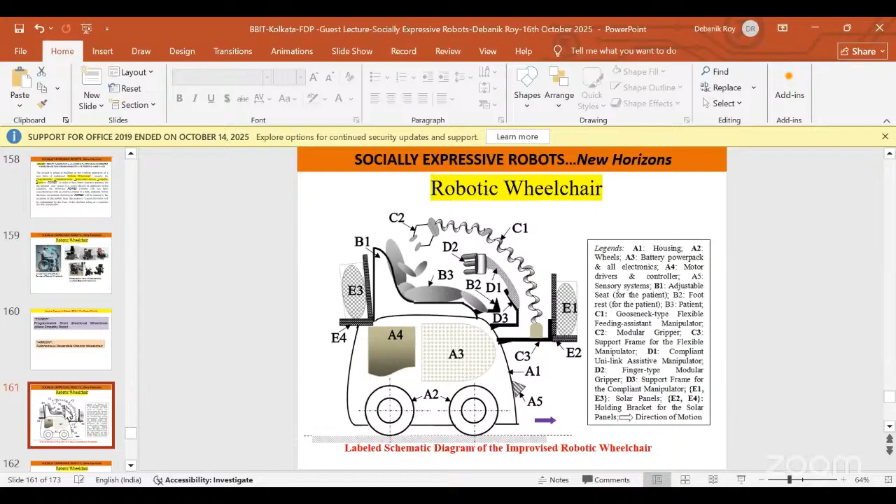All the components here are modular, meaning whenever some component is not needed, you can just remove it. This is actually for commercialization, because whenever we go for commercialization, we need modularity. Unless we give the buyer a product which he or she actually intends to buy, there is no point in making any business out of it. So that's the idea for this thing right now.

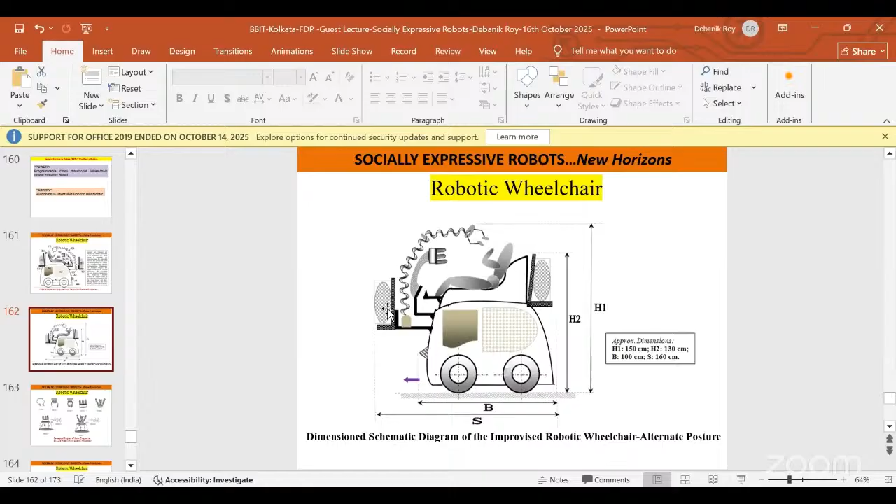So these designs are getting developed on the drawing table, like in CAD software, etc. Hopefully in another 6-7 months, the whole design will be able to go for an initial test setup or initial prototype, and the dimensions and other things have been chalked out.

The interesting feature of our wheelchair is basically the end effector or the grippers. No wheelchair, even abroad, has this. Wheelchairs abroad are basically built on motion technology - they can have autonomous motion to the extent possible, but they don't have any feeding systems. So this feeding system is a unique feature that our wheelchair has.

I have actually made 7 designs of the grippers that we can use on a modular basis - that is, whenever the customer needs a particular design, we can offer the same thing to him. So that is the idea.

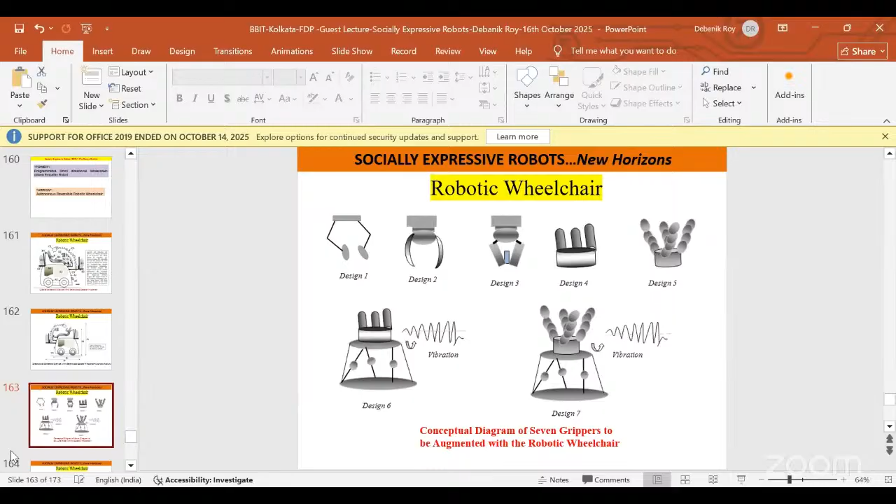All analysis etc. is going on, and after fitting, the hand - so-called hand - can be a soft finger, can be a kind of semi-compliant finger. Those will be actually fitted with the system. So 2-3 institutes in India are actually taking part in this big activity from the research point of view, apart from the company.

That's the reason we have made the seat much larger. Also, it serves a purpose since the mobile robot has to carry a heavy load - a person weighing 80 to 90 kg has to be taken by the mobile robot. So that's also a necessity for making the platform wider, and that wider platform is being used for relaxing the patient. These are some of the particular niche ideas of our design, and hopefully those will be taken care of by the company that is making the prototype ready.

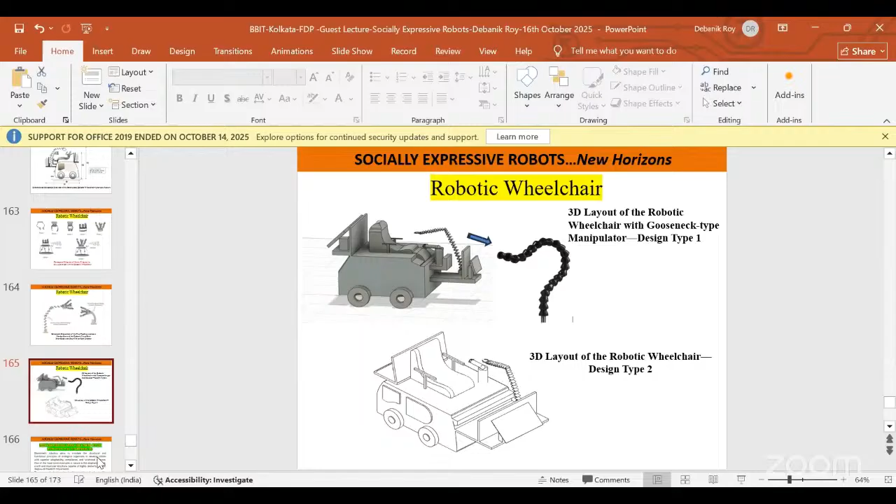And the last one, the final part of my sojourn, is basically a Ganpati robot - this is actually Lord Ganesha. As you know, in Maharashtra and Gujarat, we celebrate Ganesh Chaturthi with much fanfare, just like our Durga Puja in Bengal.

There was an interesting request that came to me, and myself and my colleague from IIT Gandhinagar started thinking - can we make a Lord Ganesha kind of robot? It started as a very interesting and light chat between us, and then we got a good number of scholars whom we involved, and they gave a very good product just 1 or 2 months back. So I thought of including these slides in this presentation also.

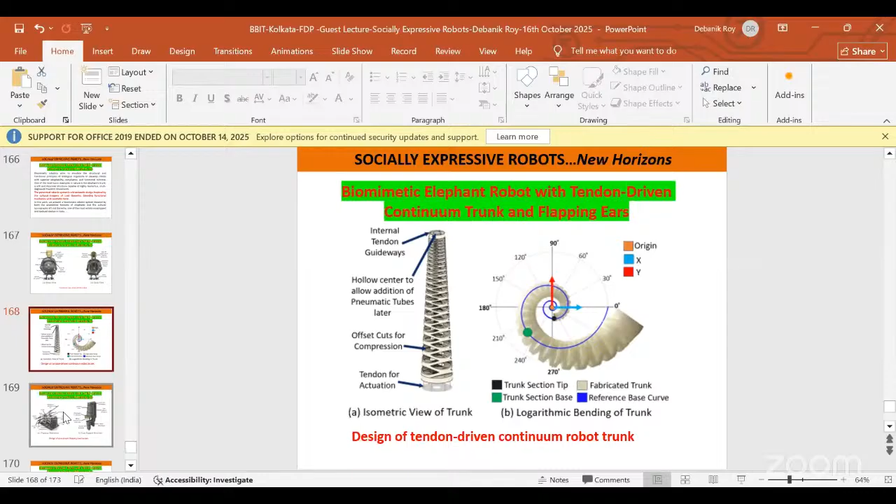I am not detailing that, but this is the way the 3D printed things happen, with our calculations. Similarly, the flapping ear mechanism is another interesting mechanism, how the ears will flap. Lord Ganesha's two big ears will flap, depending upon the sequence. It took us some time to conceptualize the angle of this flapping, and after some basic calculations we could arrive at the solution.

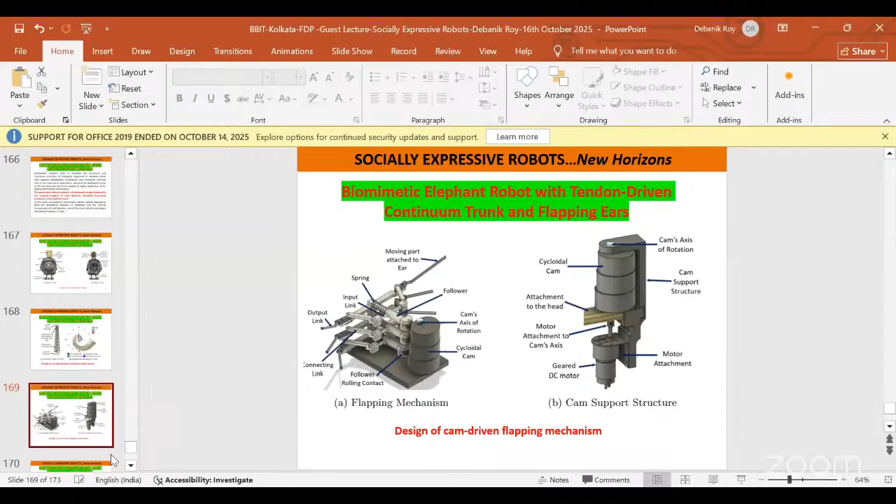So this is basically our tribute to socially expressive robots in the most Indianized context, with regards to Lord Ganesha. And with that, I am ending my talk with a namaskar to Lord Ganesha and to all of you, that we can do much good research in socially expressive robotic systems to make them more intelligent. Intelligence is anyway there, but let it be implementable AI where we can see the performance in a good way, and it will be useful for society, for the Indian community as such. Thank you very much.